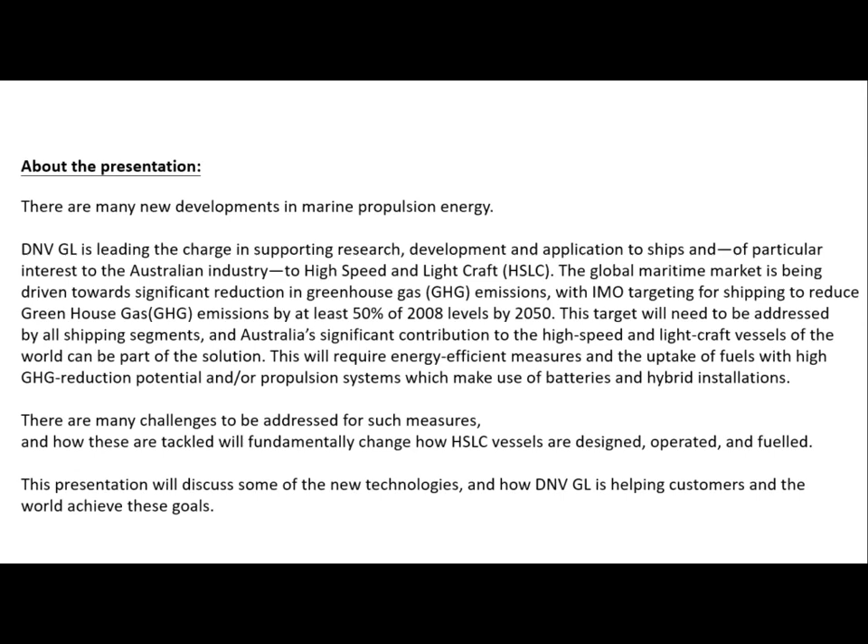Phil, I'm Jonathan Abrams, not Adam Williams. You probably can tell, and you can probably tell because I'm wearing a suit. I don't get on the tools very much.

I'm here to set the scene for one of the main parts of tonight, which is to talk about alternative fuels and where we're heading in that direction. It will cover some of what we're doing today, the most recent IMO meetings and some things that have come out of that. We'll talk a little about the practical application of alternative fuels and what we're seeing not only in Australia, but regionally and globally. This is to set the scene so that when Adam comes up and talks more about the engineering and structural side of alternative propulsion systems and fuels, it gives a backdrop on why this is happening a little faster now than in recent times.

There's no doubt about that. Let me just... Yeah, okay. Okay. No. All right, technical glitch.

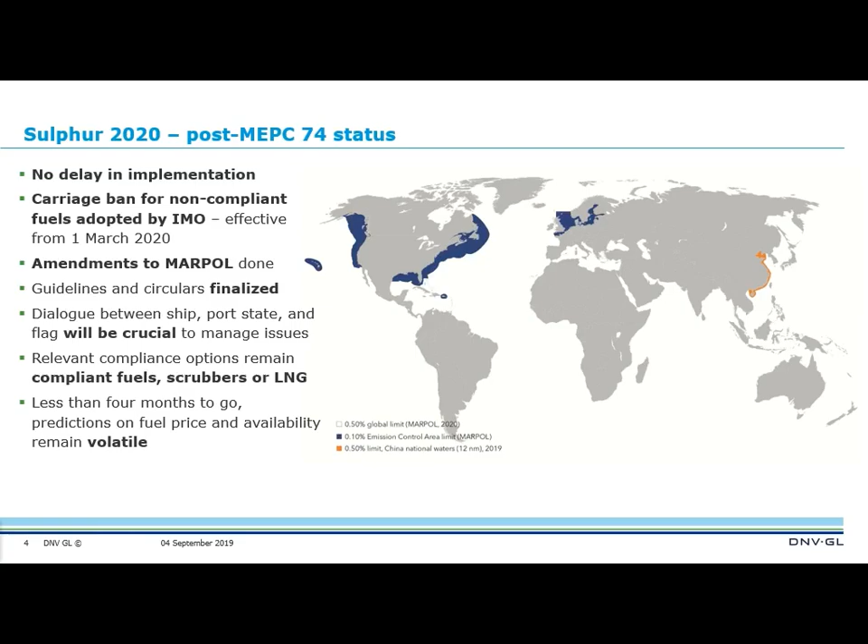The other thing is that apart from compliant fuels or scrubbers, alternative fuels come into play there. So LNG is a viable option, and those sorts of things, amongst others, which we'll talk about in a moment. So some of the outcomes, have the regulations been fast-tracked? I guess the answer is yes to some and no to others. As I say, it has been a long time coming.

Anything that goes through IMO needs a lot of lead time to get accepted, and then to be passed into law. One of the other things they're looking at is, at MEPC, with a view to reducing global emissions, what are some of the things that can be done by ships, by flag states, by the industry in general.

They're looking at setting in place short, medium and long-term measures. There were a lot of submissions from a lot of countries about what could be done. These were all open for discussion, and over the time of the meeting these things were tabled by member states, and some were discussed. Some of the simple low-hanging fruit were things like reducing speed limits to reduce fuel consumption, therefore reducing greenhouse gas emissions. Others were related to the Energy Efficiency Design Index, the Ship Energy Efficiency Management Plan, and so on. There was no single consensus on the best ones, but there were a lot tabled.

These things will be discussed, debated, and a final list of measures, cut down and divided into short, medium and long term, will be in force by the end of 2022. So change is coming. It's been a long time in starting, but it will actually ramp up quite quickly, and it will catch some people unawares. There's no doubt about it.

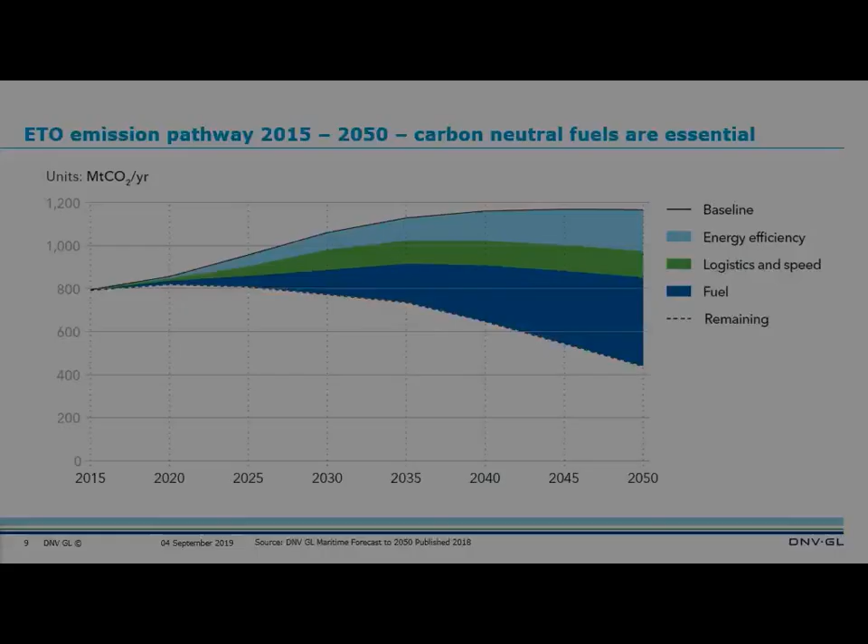So the future looks at - this is based a little bit on DNV GL research, but it's not unique to us - these are generally accepted figures on where you can find the savings to reach that target. As I said, logistics and digitalisation - digitalisation in many cases looks at optimising data about your operation so you can identify wastage and cut it. Greater than 20% can actually be reduced or found from that sort of activity.

If you look at hydrodynamics, that's the ship design - it covers not only the hull lines but also the propeller, the fins, and whatever else you might have, including coatings and the like. Another further 10 to 15%. Machinery - again optimising systems - 5 to 20%. And then the fuels and energy source could be up to 100%, and that's when you go down to zero emission fuels, which by 2050 will be commercially available and viable to some extent. But again, a lot of measures were discussed by the member states at the IMO.

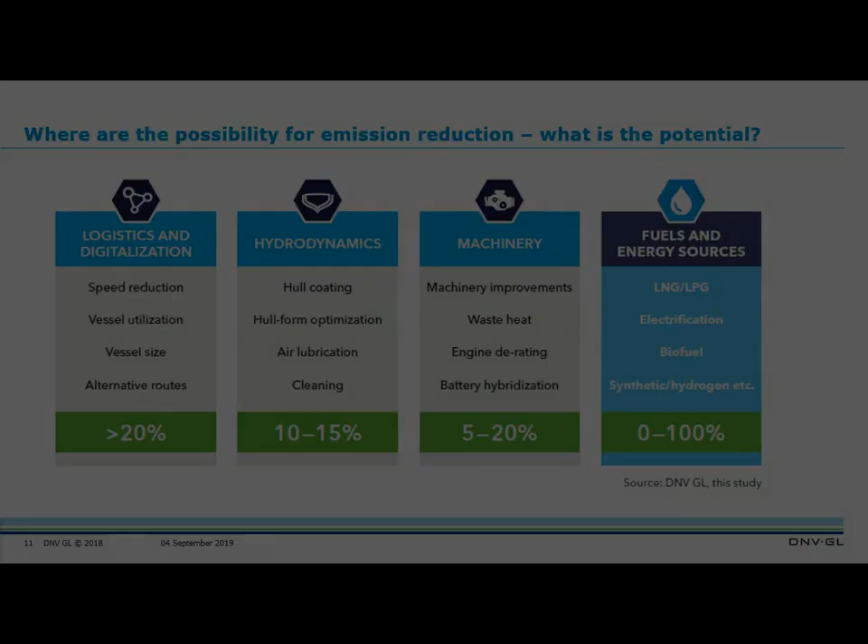Not all of these relate to ship design, but I'll highlight a couple that came out of those areas. They talk about the EEDI, the Energy Efficiency Design Index. They're looking at further developing that, taking it up to Tier 4 for new ships, with a lot of speed reduction and speed optimisation.

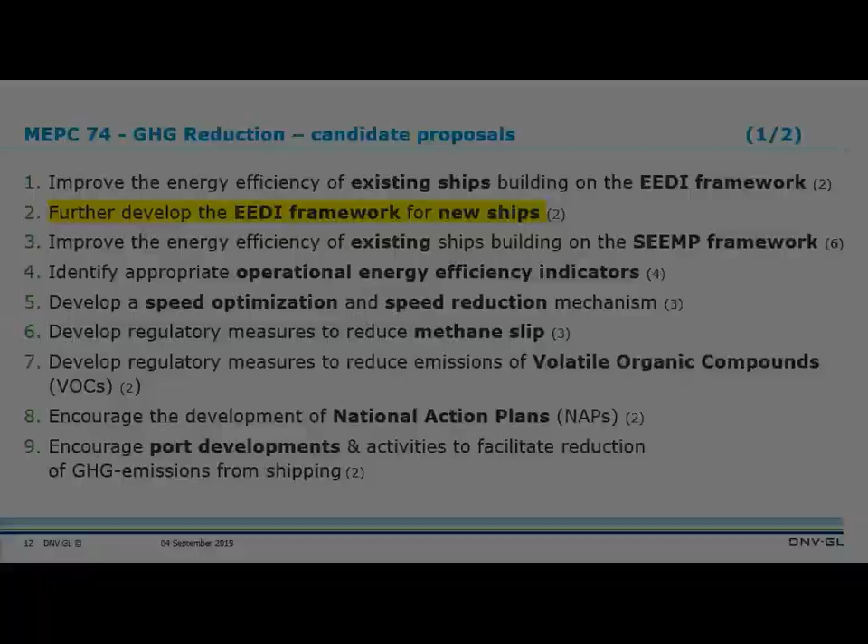Some others were research and development into new activities related to the ship as an ecosystem, not just the structure, looking at implementing the uptake of low carbon or zero emission fuels. That implementation program involves incentivising through port fee reductions, subsidised fuel, and encouraging the use of LNG systems, for example subsidies on some of the systems that go into ships.

So a range of things which were given some airtime at MEPC.

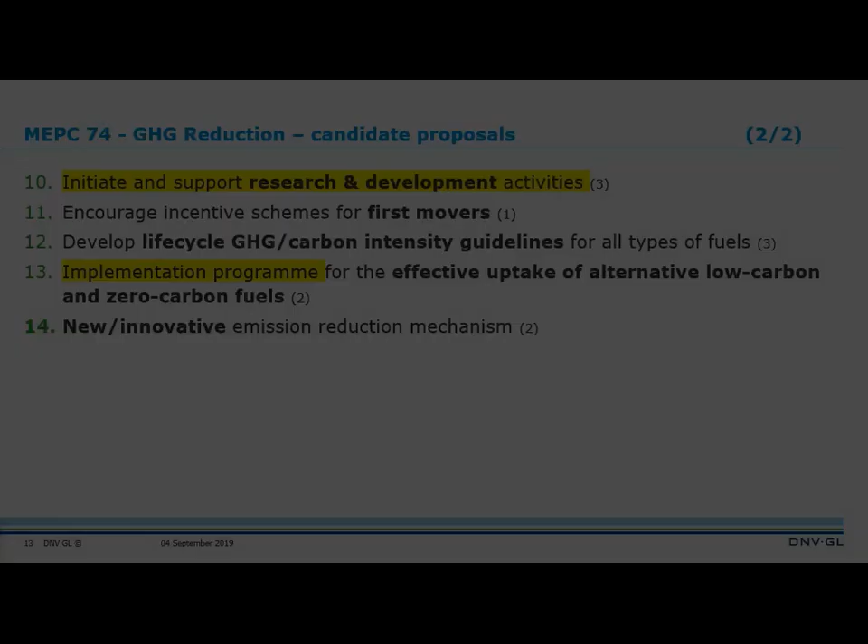The Japanese took a slightly different, more formalised approach, making mandatory design efficiency improvements—not just suggesting these, but actually making them mandatory. That's one way of forcing the issue, and within reason it was reasonably well received, but it's hard to be too dictatorial across all segments and all types.

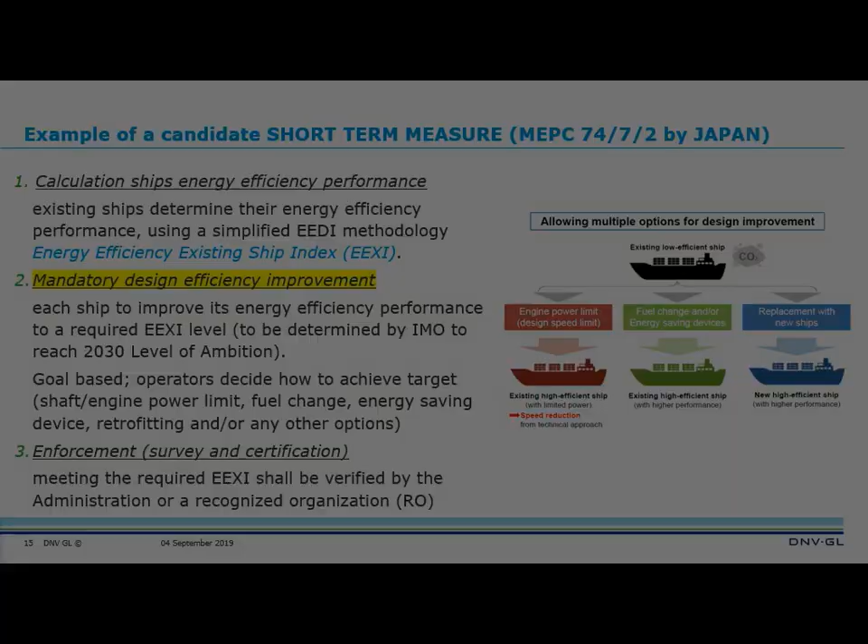The Danish talked about meeting a certain carbon intensity target which would be set by the IMO. That's one issue raised amongst a number of flag states—that a higher body like the IMO will adopt an accounting method for carbon intensity and say, Australia, this is your share of the carbon footprint, this is what you need to reduce, and you go about it any way you want.

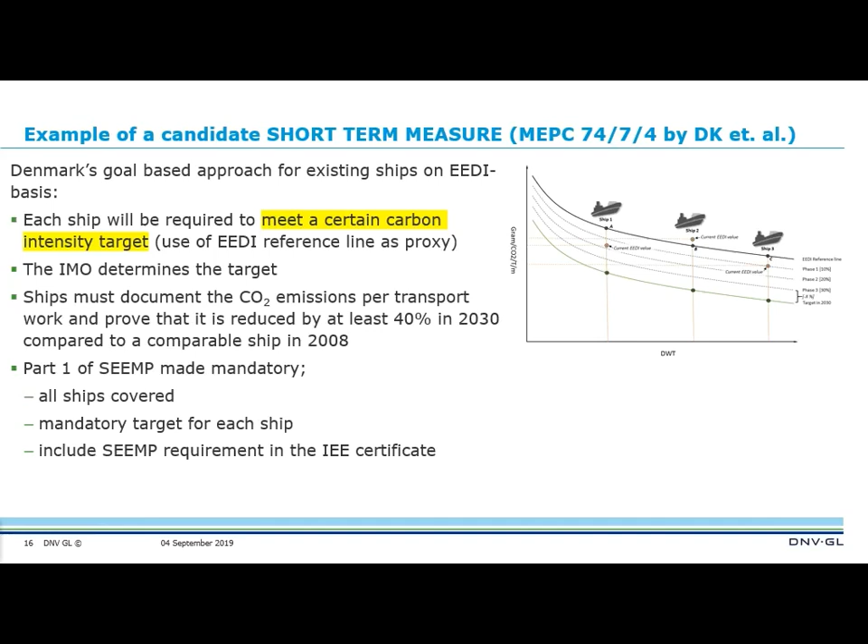Not every country was in favour of that, because those with particularly large flagged fleets, like Marshall Islands, may not actually have very much influence over what they can achieve. But again, these are things for debate.

So what is the pathway? I think everyone is hoping for a silver bullet, and everyone in this room would know that doesn't exist. We need to take a measured approach, and we also need to be practical about the implementation and the uptake.

When we look at now, next, and the future—now is today, next would be the next 10 years, the future would be heading out towards 2050—these are some of the paths or options that could be used today and in the future, which we anticipate to start heading in that direction to get down to that emission reduction target.

So the obvious ones are LNG and LPG—we'll talk a bit more about that in a moment. Over the next 10 years, we're going to see greater uptake in ammonia, biogas, hybrid technologies, hydrogen drop-in fuel cells, and the like.

When we go out to the future and talk synthetic fuels, we really mean zero emission fuels, but also ammonia, where the only byproducts are water and nitrogen. But underlying all of that, you can't just build it and hope that the effect is there.

This is where the attention to the management of the ship as an asset and in operation, as well as in design, will come into play. Going back to what the Japanese delegation proposed, some mandatory design guidance may also come into play with these things.

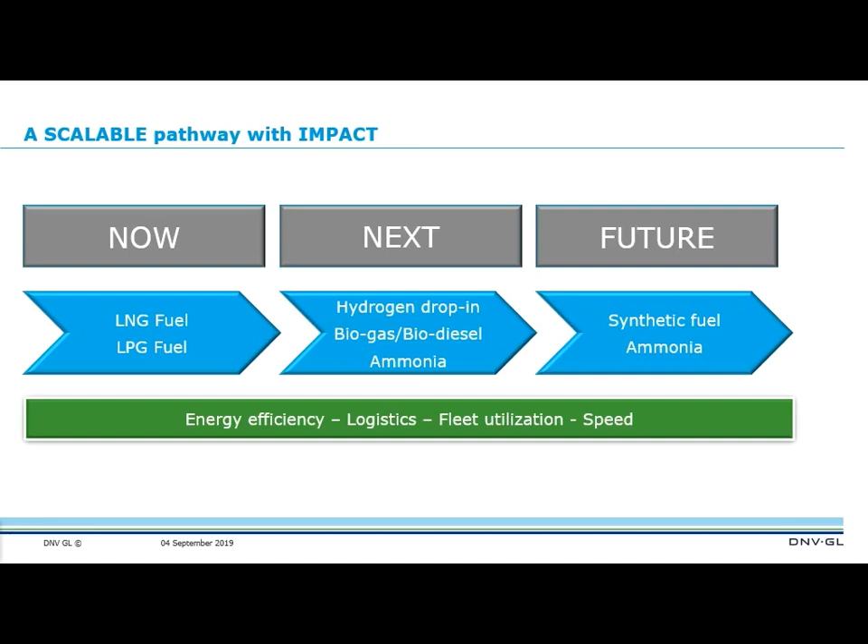Focusing a little more on the now—and I think that's what we're talking about with what Adam will cover as well—what are some of the things we're seeing today in this alternative fuels sector? LNG is one of those areas.

LNG has been big, viable, and growing in Northern Europe for some time. It's getting more attention in Australia than ever before, simply because we make and export more of it than any other nation on earth. So what is the uptake of LNG as a marine fuel looking like at the moment? Short answer: it's going pretty slow, but it's getting more and more momentum as we go along.

Key to this, which is always surprising, is how little there is in Southeast Asia and Asia in general. It's turning into, in many ways, the hub of global maritime business, certainly shipbuilding. But there's very little uptake as yet in LNG, despite the fact that a hell of a lot of LNG from Australian gas fields goes to China, Japan, Korea, Taiwan.

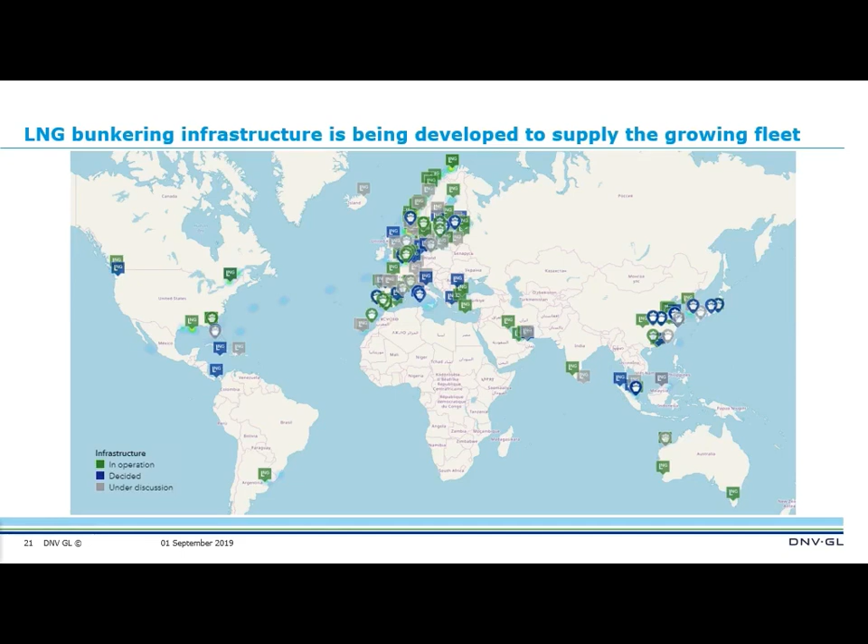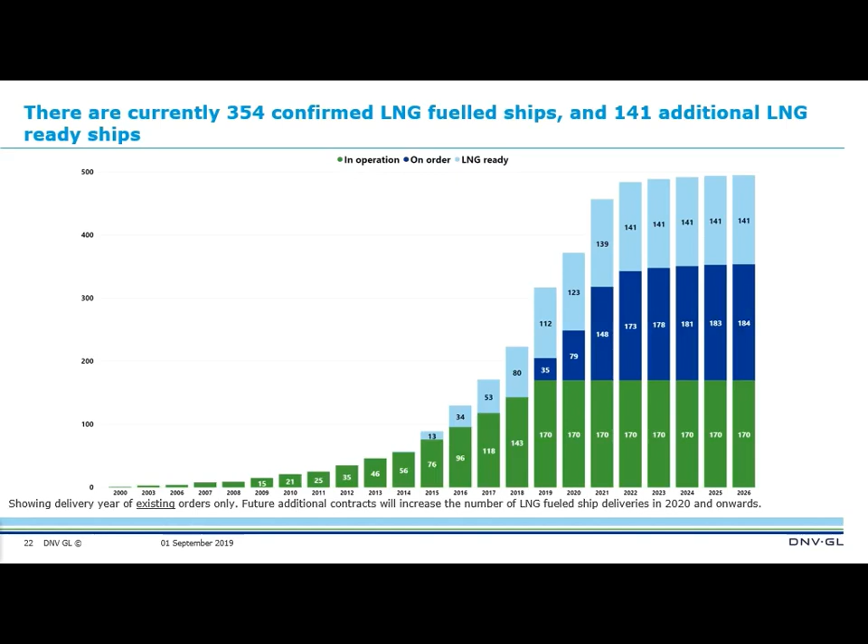Put it into context, at the moment there are 354 confirmed LNG fueled ships globally sailing, and 141 which are LNG ready, deliberately built to retrofit up to that. It's not a lot when you think of how many ships there are sailing globally, but it is increasing. This last month there was another 17 or 20 new LNG fueled ships on the order book, and that's significantly more than in July. So it is ramping up.

By segment, we're looking at car and passenger ferries as the tallest one. This is largely driven by the likes of Carnival and Royal Caribbean, who tend to, because there is an emission control area in Europe and in North America, use this as one alternative they can take as well. The other big ones were container ships and cruise ships as well.

So it's in that sort of space, but there's not a lot in bulk shipping for sure, despite efforts by BHP to lift that number. Those orders haven't been placed, so this is only ordered or known orders, but it is moving in that right direction.

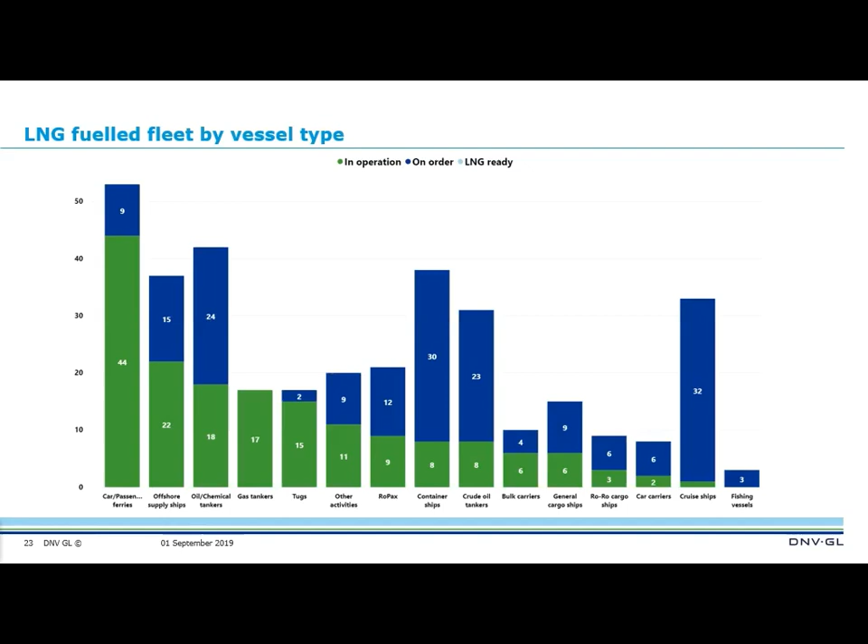Scrubbers I'll touch on very briefly, only to give it in contrast, because going forward for compliance after 2020, you have to have used low sulfur fuel or gas oil, LNG or something similar, or have a scrubber fitted so you can use HFO. There has been an explosion in the fitting of scrubbers to ships globally. They're everywhere. There will be more of them, but there is a constraint on the number of ships that can be fitted in time, particularly over the next couple of years, to expand this number exponentially.

In terms of the payback on scrubbers, when the difference between low sulfur fuel, the new compliant fuel, and HFO is very wide, payback is obviously very short. But what we're seeing at the moment is, even in the last 3 months, the delta between low sulfur fuel or gas oil and heavy fuel oil is actually getting narrower and narrower, which means the business case to install a scrubber is getting weaker and weaker over time.

Most vessels which you see here have been installed as retrofits. New builds are now getting built with scrubbers on board, but again, that position is starting to weaken because there is another problem with actually getting supplies of HFO after 2020, when very few ships will actually be able to use it.

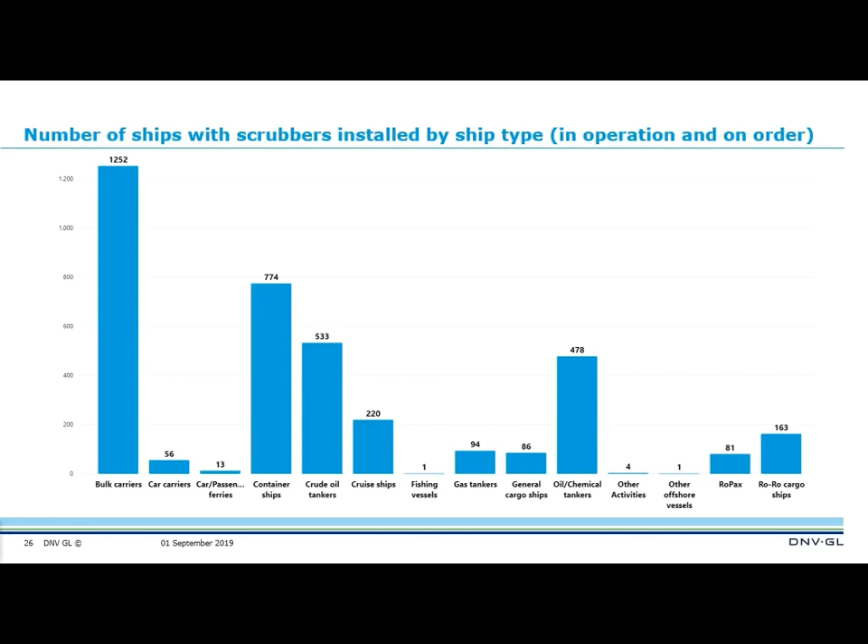Open loop, closed loop, hybrid scrubbers - it's an environmental issue or an environmental furphy, depending on who you talk to. But there are various regulations around discharge of sulphur from an open loop scrubber directly into seawater, particularly around sensitive areas like the Great Barrier Reef or in certain ports.

Getting close to the end here. Batteries is something which Adam will go particularly into, but it's again something you can see in Norway. These are ships which have diesel electric systems, generally speaking. There'd be some pure electric systems in there, but a lot of them are diesel electric. Again, you look at where they're most clustered, and that's Norway.

That's directly a result of the incentive program the Norwegian government have initiated more recently. But there are a few in Australia as well - several tugs which Svitzer own and operate around Gorgon and some of the other facilities. So there's a bit of an uptake, but they're limited by their range. Batteries don't yet have a viable solution to be scaled up to deep sea and international shipping.

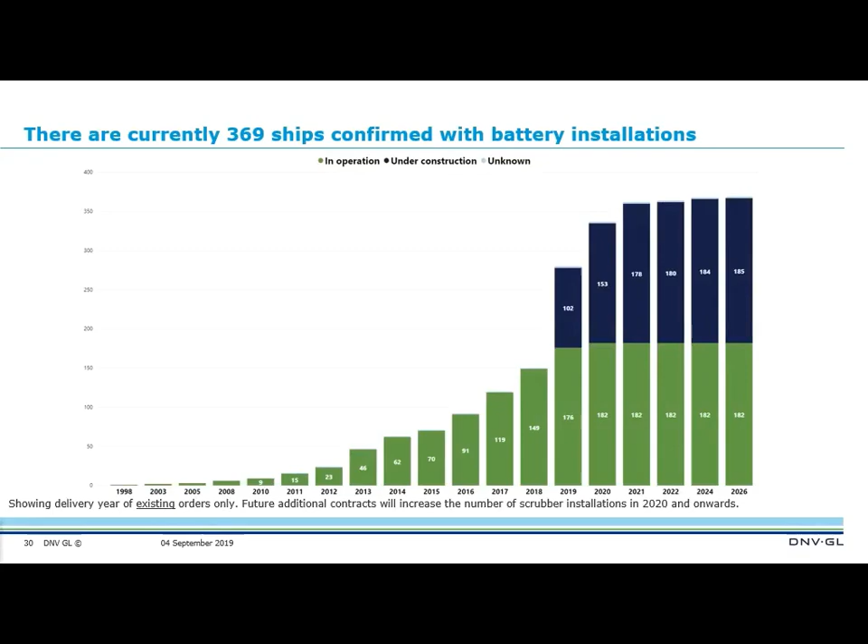Interestingly, there are 369 ships confirmed with battery today, which is very similar to the number of LNG confirmed ships. So they're tracking similarly, but they have a vastly different way to go in terms of their application.

Again, without wanting to ring alarm bells, but rather setting the scene - things have been moving very quickly over the last 18 months as IMO 2020 comes on. People are looking for solutions to avoid the price hit that will come from having to go to marine gas oil or low sulphur fuel.

But these are not the only things the shipping industry needs to be worried about, because when you sort out sulphur, you then have NOx, and then you may have noise and vibration, and particulate matter. There's a whole range of things on the community's agenda to try and fix. We talk about biofouling as well, and invasive species - that's something getting increasingly focused on in this day and age. Underwater noise is a very key one, and there's also ship airborne noise as well.

One of the biggest problems that Gore Bay has here - the Shell or Viva refinery facility - is not so much with emissions, because they're running on gas oil when in harbour, but it's the airborne noise, not only at the high frequency but the very low frequencies as well, which can propagate right across to Balmain. I don't know the full effect, but apparently it makes you feel very sick.

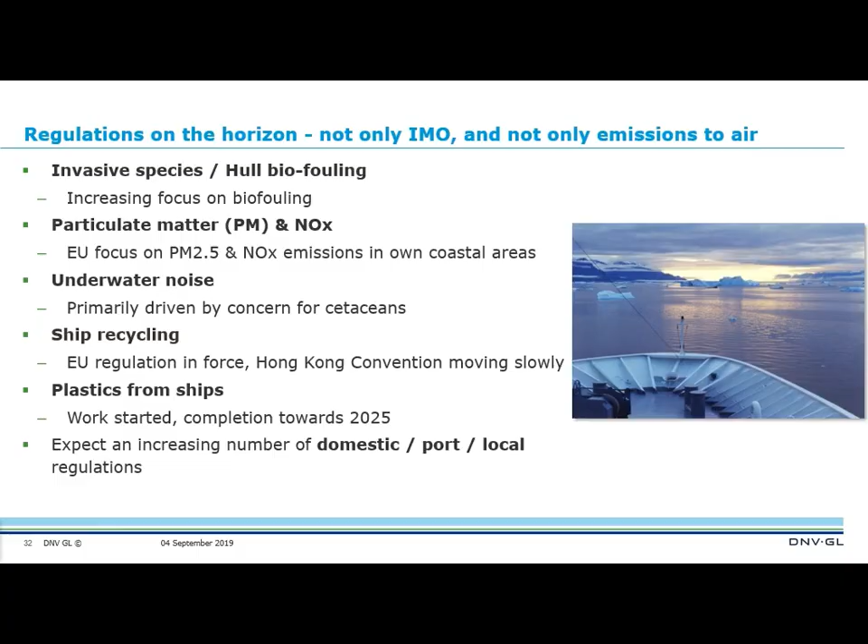So there will be, on the back of all these issues, or not new issues, but things coming into the spotlight, increasing attention to regulations. And it's not just one size fits all, even in a country like Australia. There's the national regulations, the state regulations, the port regulations, and that includes the EPA, which don't traditionally work on water, but because the port facilities are subject to EPA regulations, there's a lot of attention in this area as well. So it's not to prepare for the storm, but it is a little bit about being ready for change.

I think as we go, just about to finish here, and I'm sorry for dragging it on too long, but the changes being talked about here will start to impact vessel design and operation very soon.

We, as a company, and certainly from the advisory side, do a lot of work in new vessel design, assessing them relative to regulations, doing model testing around emissions and around efficiencies as well.

There is this push from the supply chain, from the charterers, to make sure that shipping is using as low carbon fuels as possible. They're looking at carbon neutral fuels as well, something which needs to grow in recognition and in application. These things aren't going to be announced tomorrow, but there's a lot of talk about it, and it's an ongoing process.

Believe me, I'm sure we'll all experience it - by the time a new regulation about carbon emissions or zero emission fuels comes in, there'll be a lot of people who say they'd never heard about this before. But we've been talking about this for 20 years, and it will go on as we get closer to 2050.

So I'll take a breath now and get out of your face. It was to try and set the scene, not to ring alarm bells, but to set the scene that what Adam, the design team, and DNVGL do is try to service the industry in any way, shape or form that suits the purpose.

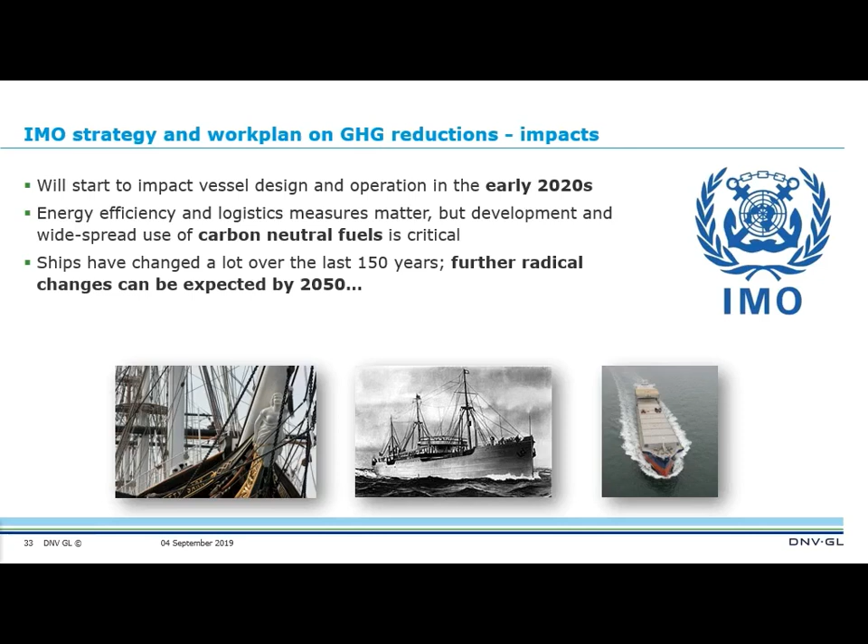Great, thanks Jonathan. I think he's pretty much set the scene of what's coming. Jonathan's more focused on what he's seeing at the IMO, and what I'm doing is more with ship structures and what we're actually seeing through DNV. By no means am I an expert in some of the technologies I'm talking about, but I'm trying to say what we're trying to provide, what we're trying to do, and what we're going to go through.

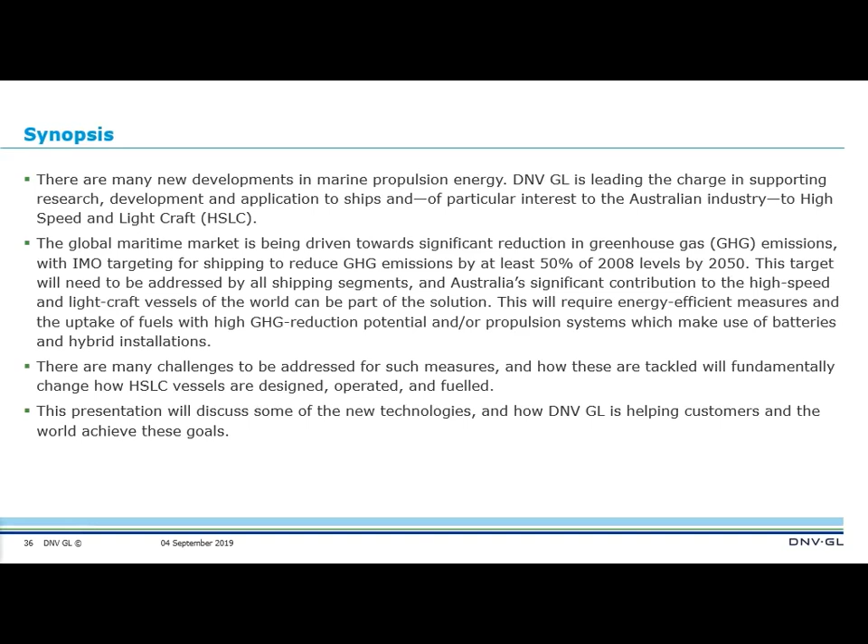A number of the technologies that are coming, as Jonathan said, we're going to be seeing in the next few years, whether we like them or not. That's just a synopsis.

I'll actually just go through that. Tonight I'm going to talk primarily about three main technologies being used in ships: batteries, fuel cells, and gas fuel. Those can all be used together or independently, so it's a little bit confusing, and if items are being repeated, I apologize. As I say, you can quite often have a gas fuel installation with batteries - a hybrid - or fuel cells and batteries to store power.

So I'm going to start with batteries. Just briefly, I'll use this with a couple of different slides, looking at the energy densities. Tonight's talk in particular is about high-speed light craft, and the reason I chose that is because Australia is a very large producer of high-speed light craft ferries. We've got a number of builders in Australia, a number of successful designers, and I think we're servicing the world to a very good rate.

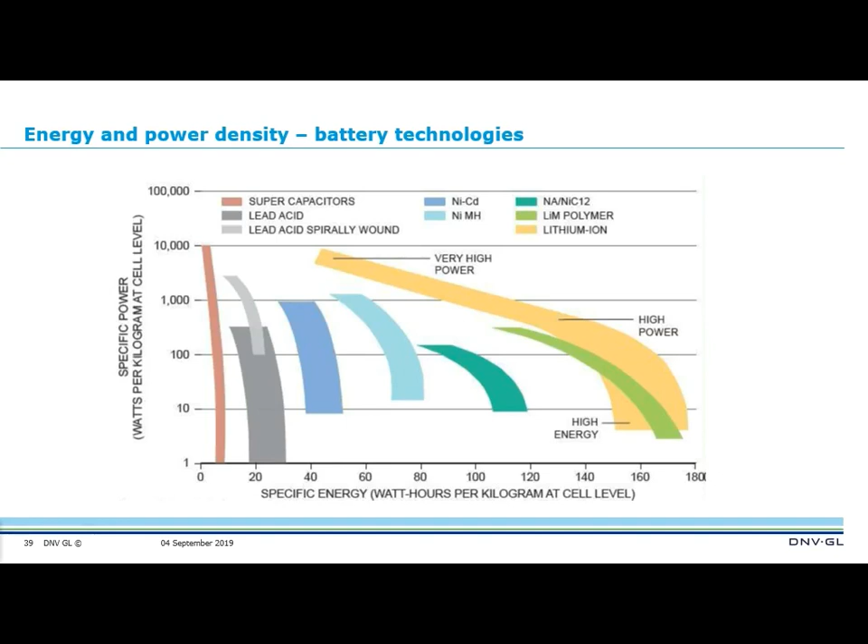I must admit, when I started looking, I wasn't sure of, when somebody said a battery, are we talking a tank with some acids in it? What are we talking about?

So there are actually different formats. You've got obviously the different chemistries, and then you've got the different ways that those are presented, which presents many challenges when it comes to actually installing in a ship. What we're seeing is it's not one size fits all. There's different ways to handle that.

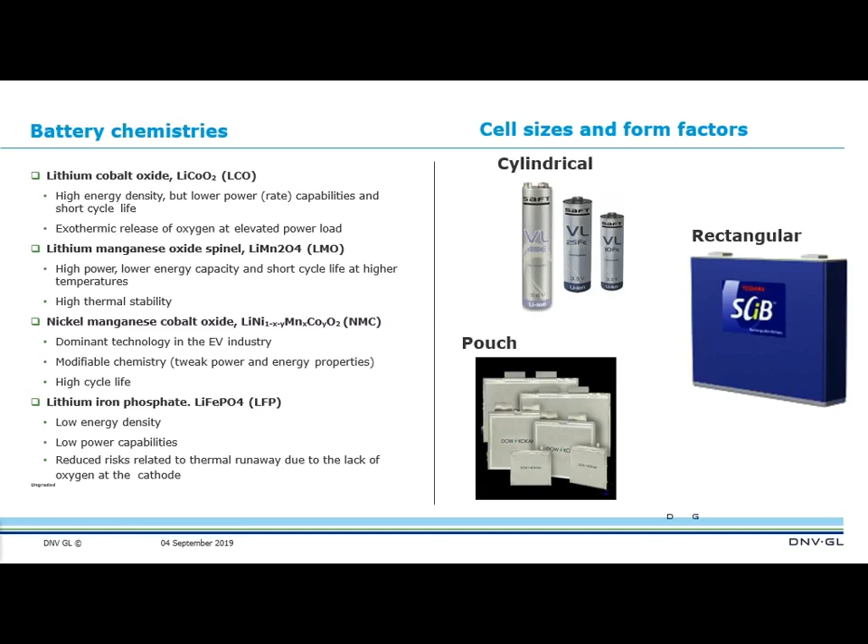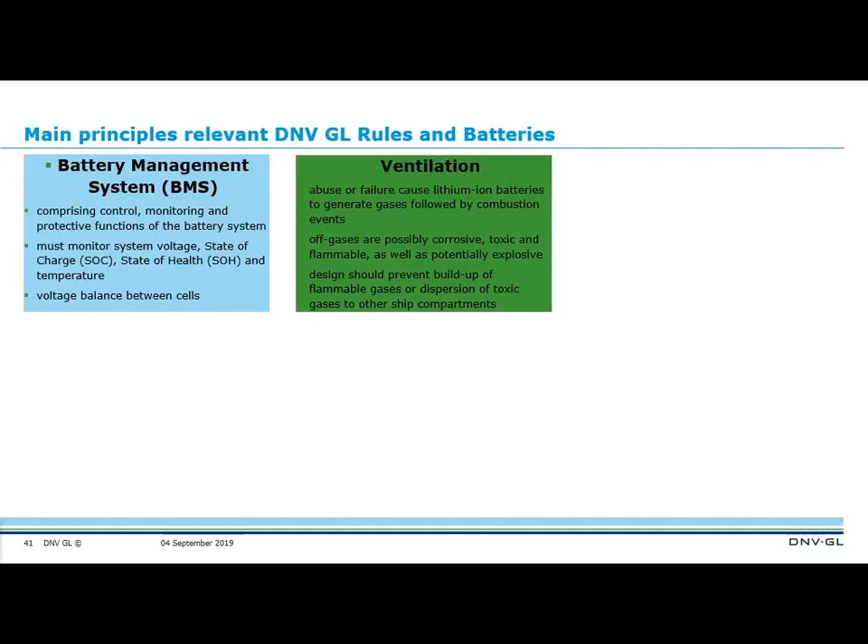One thing we need to consider is how DNV is approaching how to install those. I'll quickly run through the items that are considered, and basically you need to look at how your batteries are being managed. It's not just as simple as connecting your batteries up all in series or in parallel and then just running with the power. You actually have to monitor every cell.

You have to make sure that each cell's state of charge and state of health is being regulated. When you charge it, you have to actually look after each cell. If you don't do that, you'll find that you've got one dead cell and you're actually creating problems.

Ventilation - when things go wrong, you need to be able to get rid of gases. When they fail, they typically what they call gas off, and that gas off can lead to quite corrosive, quite dangerous, quite toxic chemicals. So these are the sorts of things you need to do.

Power system integration - you can't just have the batteries and hope everything works. You need to actually see how that's working with hotel load, with your engine requirements, with various different systems that are on the ship.

Fire protection. We've all heard about people not being able to carry their laptops or phones in certain places. Well, it's very similar on ships. You need to basically be able to manage that, and if things do go wrong, what do you do about it?

Thermal management. When you've charged your battery on your phone, you've probably felt that it gets quite hot. Again, there is a lot of heat in its use. If you're demanding a large amount of power from a battery, that can create a substantial amount of heat, so you have to cool them. And if you don't cool them efficiently and effectively, they can break down and you have a failure.

And then the last one, inversion technology. Now, one thing I'll note is that with electrics and batteries, one advantage is you can actually have your power source, your batteries, almost anywhere on the ship because you can connect it via cables. You're in a situation where you can optimise the location throughout the vessel, which I think will be beneficial for high-speed light craft.

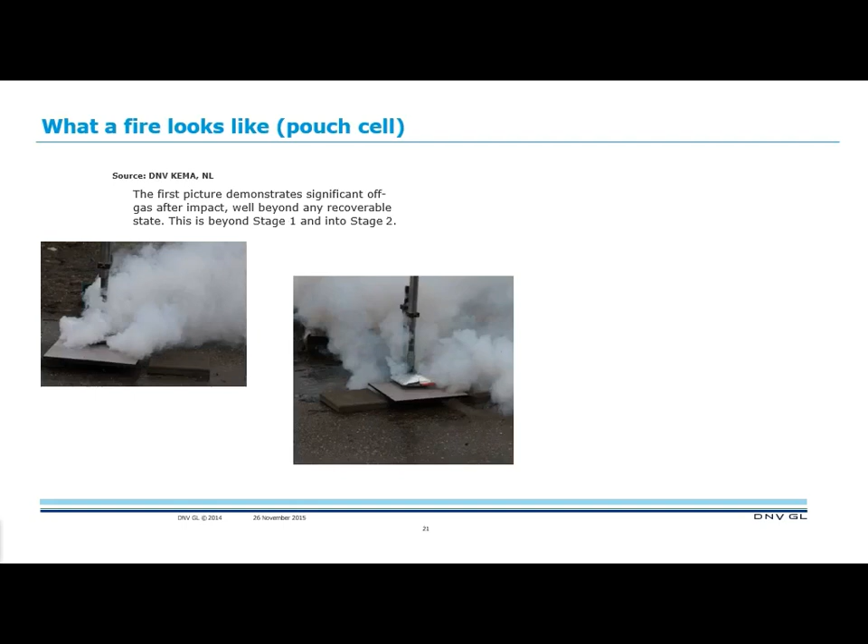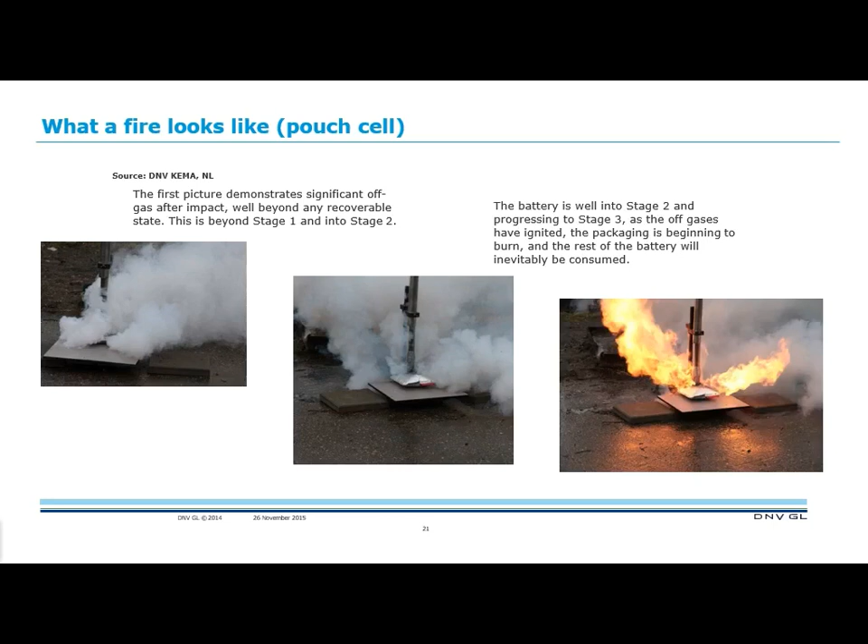Now, I mentioned the fires. This was a demonstration done by DNV KEMA, and they wanted to look at what happens to a battery. I believe it actually pierces the side of the cell. You can see that it's gassing off, and then it obviously catches fire. Think about the amount of power that's stored within a battery. This is a pouch cell, and once it shorts, there's no controlling it. Very difficult to manage.

I mentioned that for vessels there's no one single source, and the next two vessels I'm about to show you are a good example of that. The first one's the Vision of the Fjords. As Jonathan mentioned, the Norwegians are really pushing ahead. One of the companies works near Flåm, and it's a carbon fibre vessel, 42 metres long. This one's a hybrid with batteries and also diesel. Quite an interesting design, quite unique.

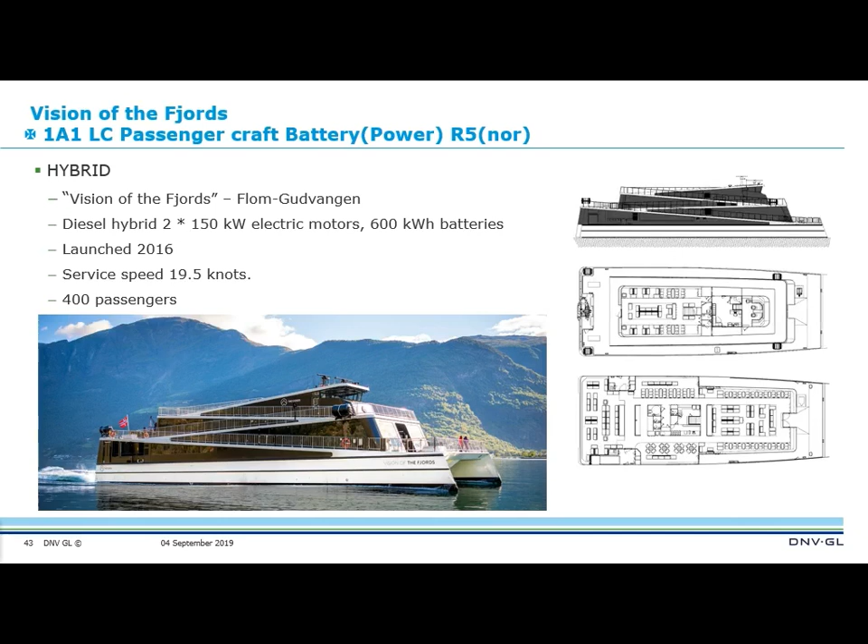The thing is, its sister ship looks very much the same, but in this case it's full batteries. So they've learned from the technology of the hybrid, and they've gone to the batteries. Now, one challenge that was put forward with having a vessel that requires that much power is how do you charge it? You plug it in overnight?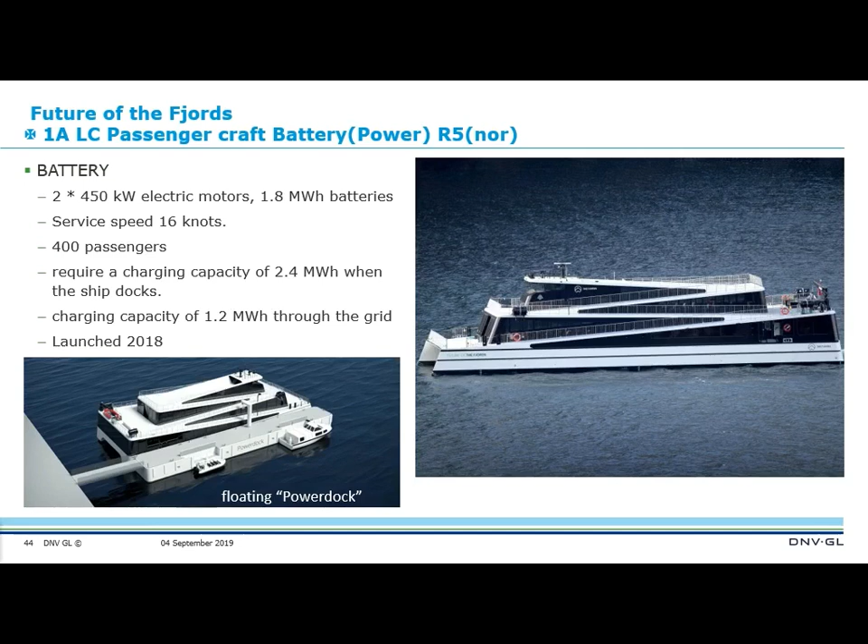Well, because of the requirements, they worked out they could do this. This item here - they've called that the power dock. It's got 5.5 tonnes of batteries in it, and it sits there trickle charging from the local grid during the day. As the vessel, the Future of the Fjords, pulls up, it's able to be charged within 20 minutes and keep going on its run. So yeah, pretty amazing thing.

So this is when looking at the installation and the way forward, and DNV is what we're working with, and DNVGL is actually originally Norwegian, so it's quite obvious that we'd be working with it. So we've got notations within our rules, in particular, they are actually in the rules for ships. However, if you're doing high-speed light craft, you start with the rules for ships, you talk to us, and we make them fit. So that's not too much of an issue. There's not much point actually writing two separate sets of rules because the basics of safety, etc., are pretty much the same.

The notations we've got is battery, battery with a notation of power or safety. The power one is when the vessel is basically using battery 100%, there's no second source of power, whereas safety is where you've got a hybrid.

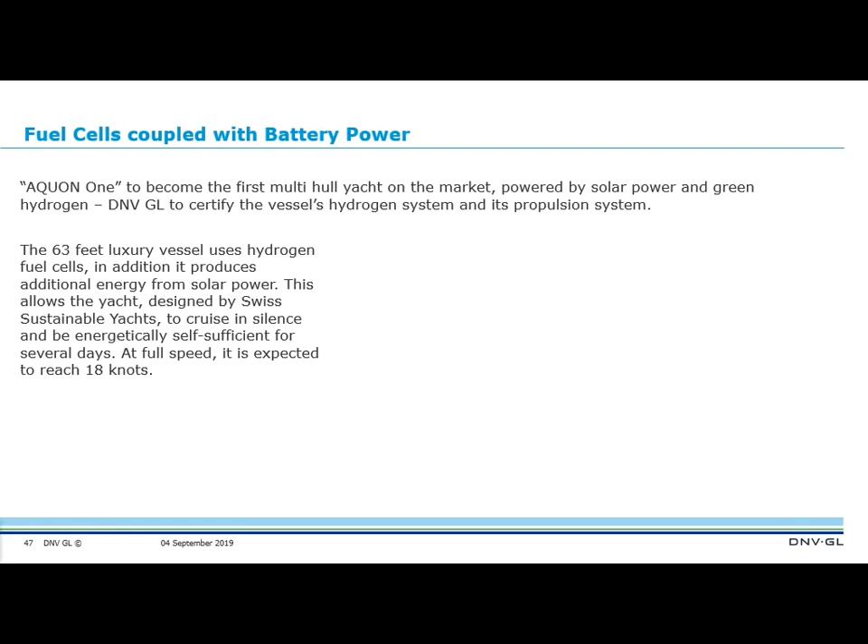Second one that I hope to talk about is fuel cells. This is a vessel that DNVGL is working, we're working to certify the hydrogen system and the propulsion system. It's an interesting design, this one's actually not commercial as such, it's a yacht. The idea will be that the designer, Swiss Sustainable Yachts, are putting forward a design to pretty much take advantage of lots of wealthy people who would like to have something that's green.

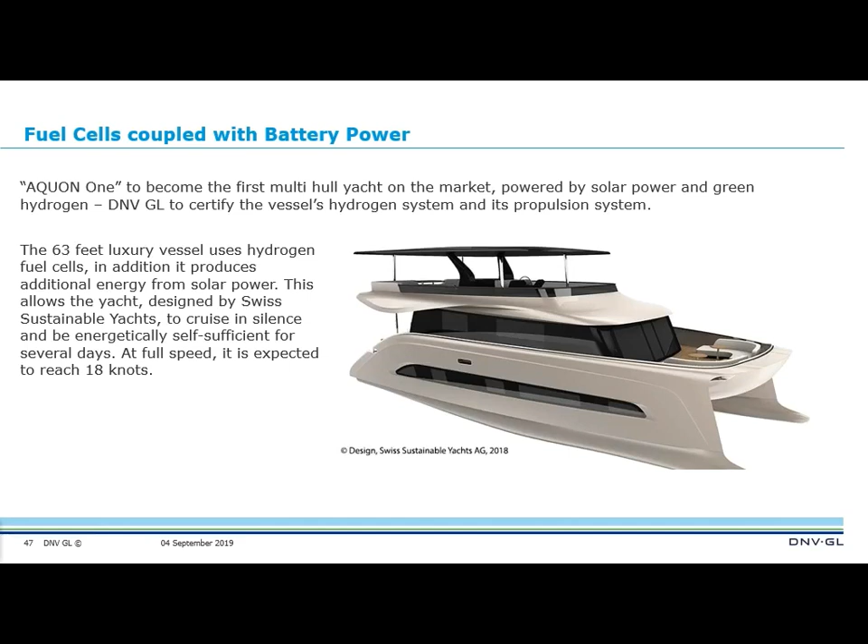What's not obvious in that picture is the top of the sun deck is actually a solar panel, so it's actually able to charge some of its own. The solar panel on top will help recharge the batteries, and therefore will extend its operational capabilities. And DNVGL's working with the certification of the hydrogen systems.

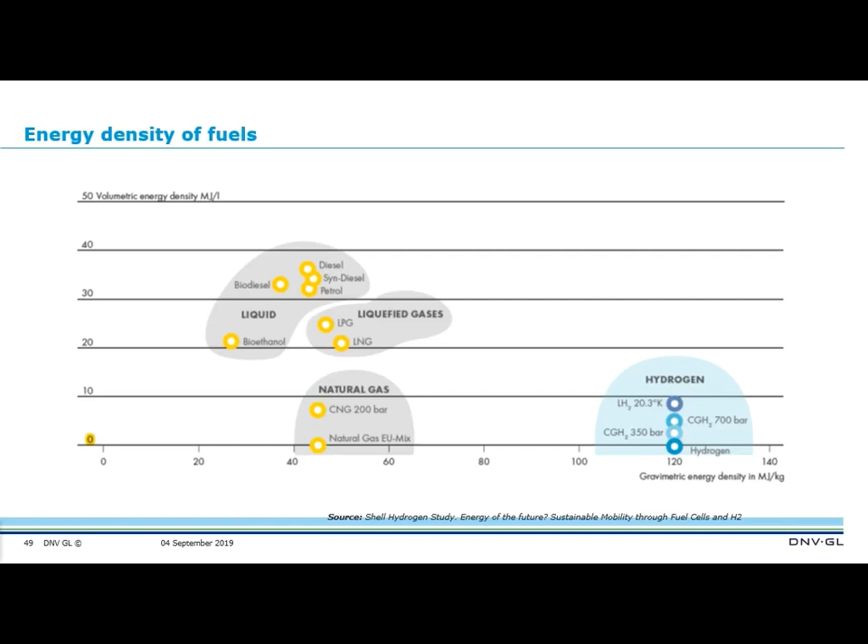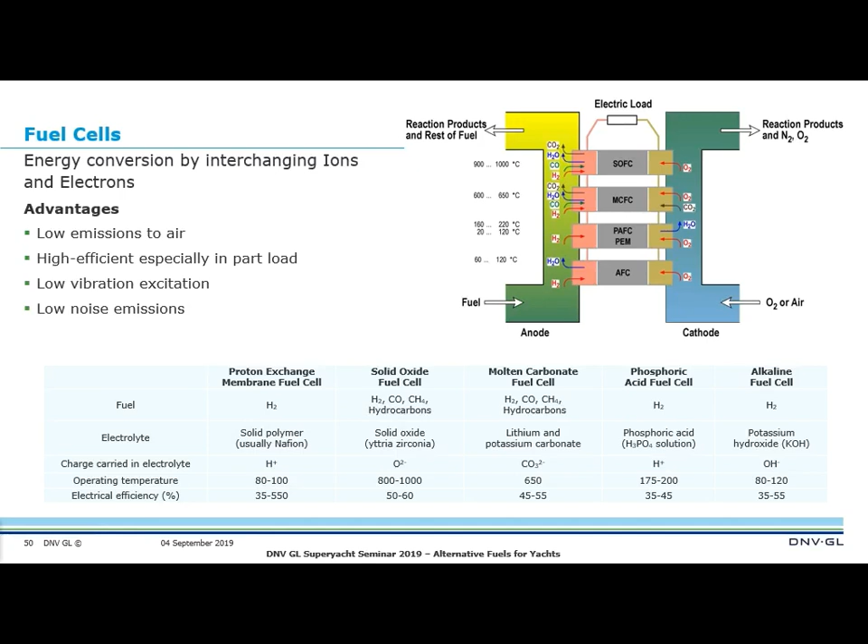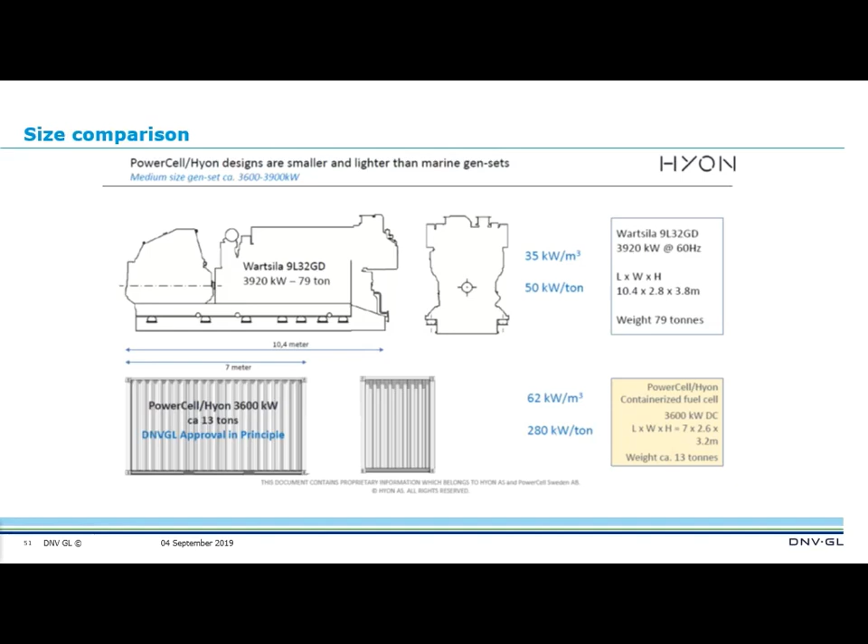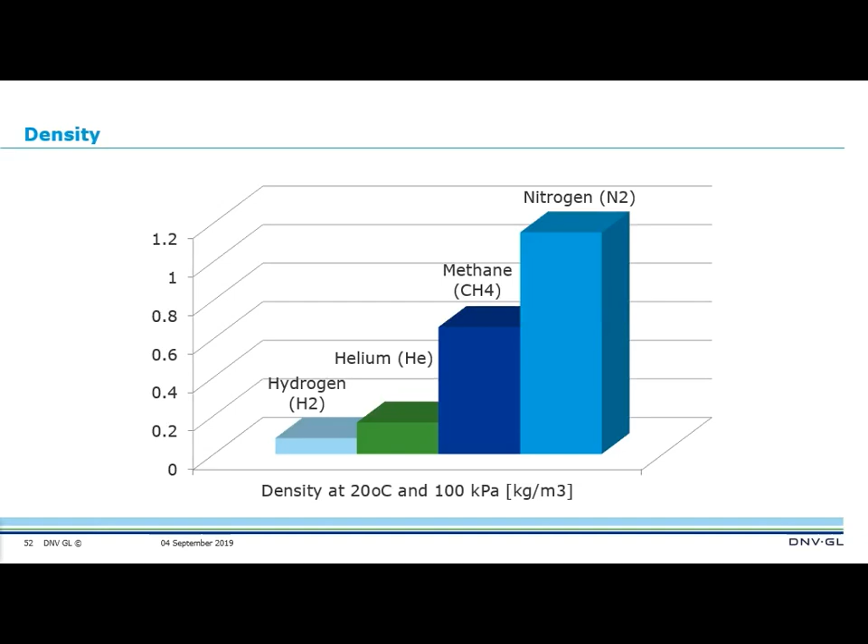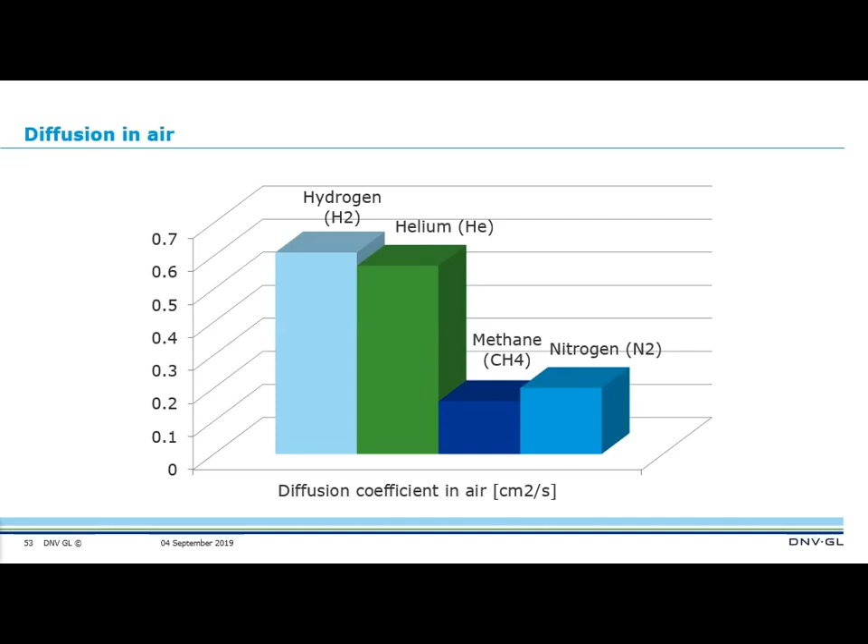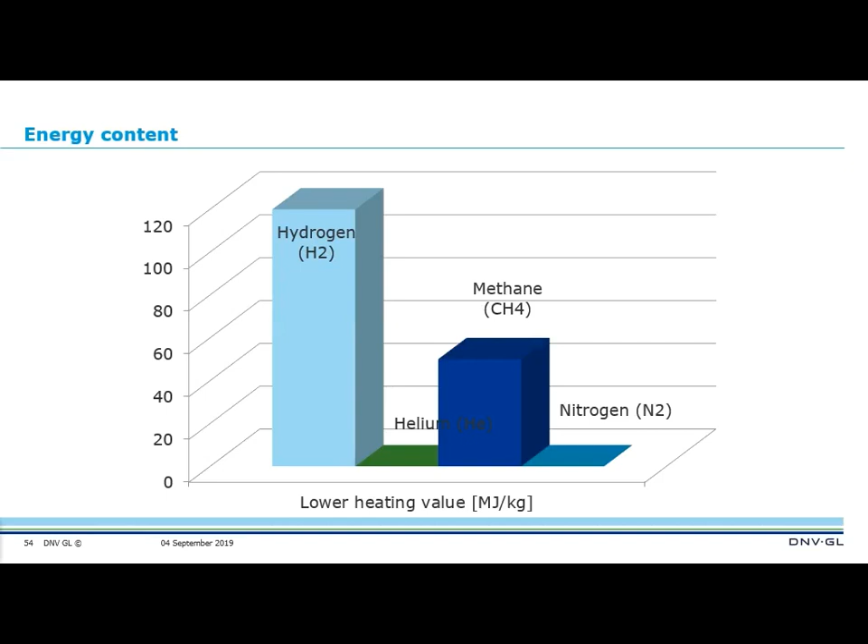Energy content - as I mentioned before, hydrogen has the highest energy content per kilogram, but you've got to get it into kilograms that are manageable and usable so you can take advantage of that.

Flammability - this one's about safety. Hydrogen's flammable range is from 4% to 75%, which means it doesn't matter how much is released, or whether it's a small space or a large space, it's something that needs to be managed. It can become very dangerous very quickly. Compare that to methane, propane, and traditional petrol, and you can see that presents a challenge.

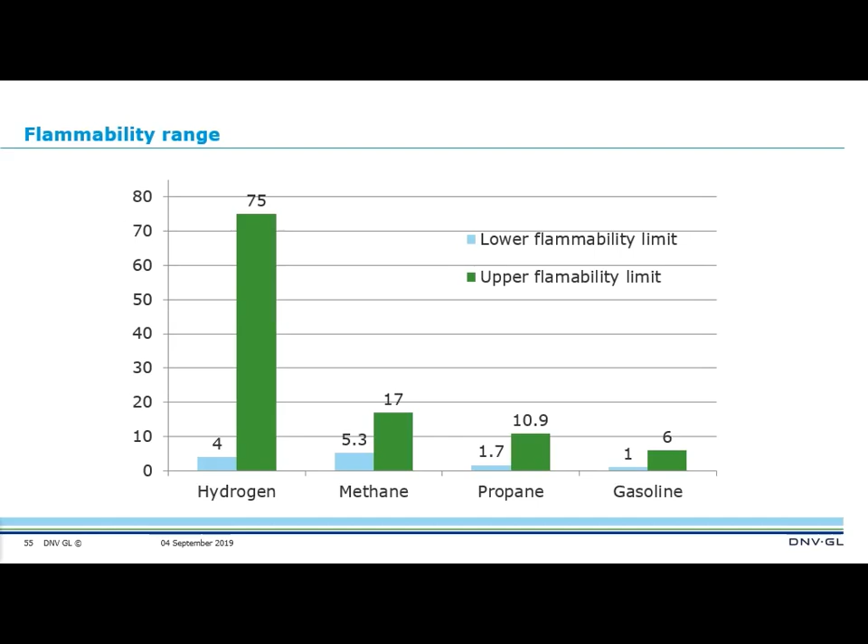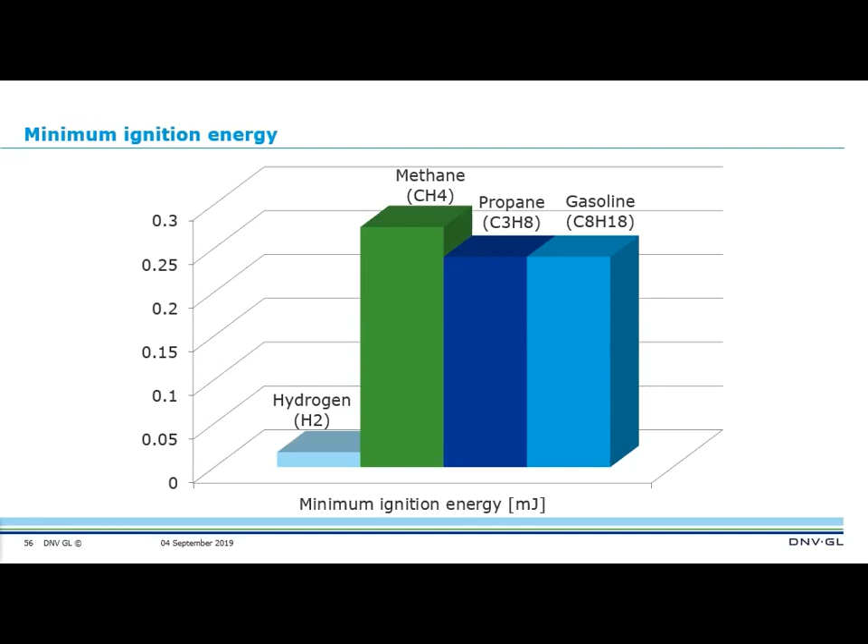Ignition energy - again, it doesn't take much to set fire. The other interesting thing is that a hydrogen flame is invisible, so it's not immediately apparent when you enter a space that's got a fire, assuming you haven't had an explosion. If you've got a problem, it's not immediately apparent - you can't see it.

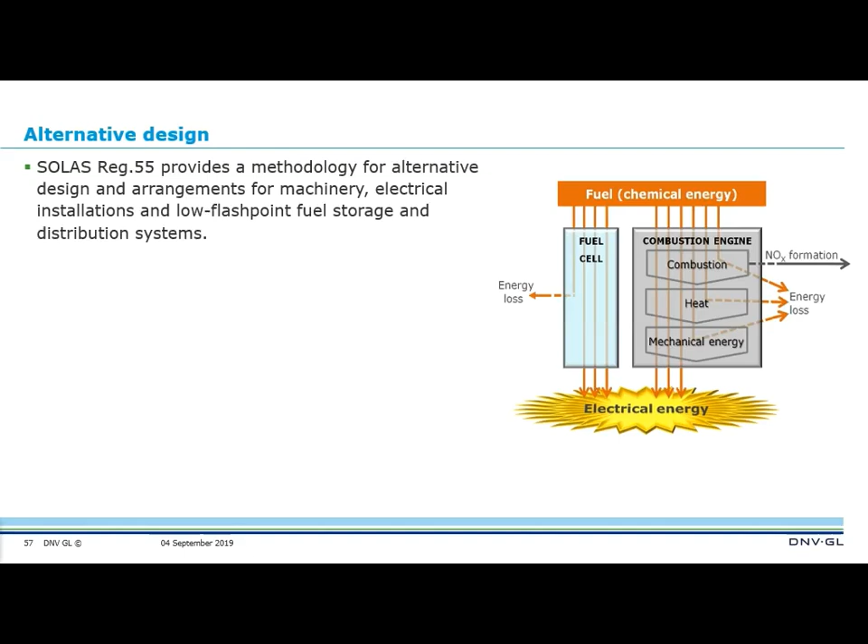So looking at regulation and how hydrogen is managed, you might be familiar with, and I think one of the next slides talks about, the IGF code. We need to look at how hydrogen is considered and installed on a ship, which needs to be done through an alternative design approach. There are guidelines for that alternative approach, and I'm giving a reference to the IMO document.

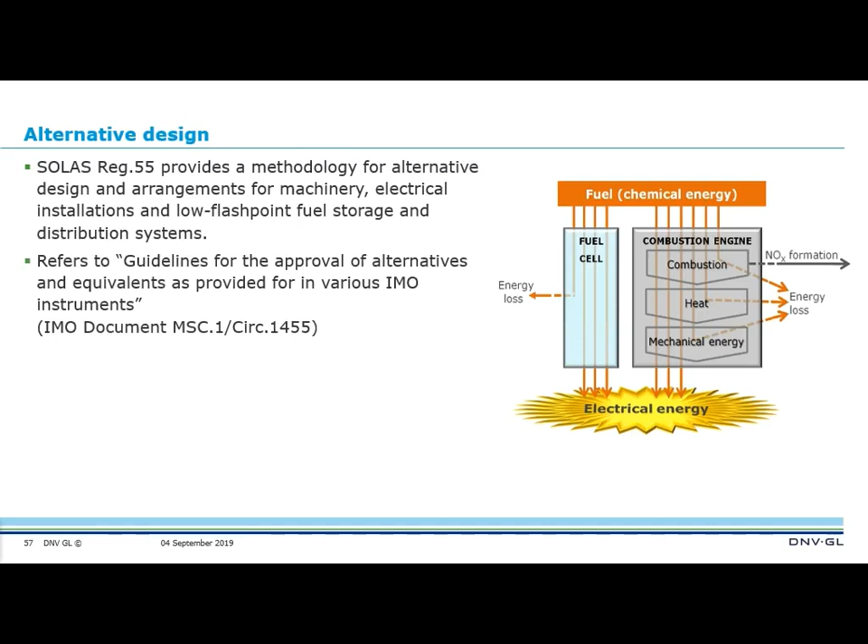So we're talking about safety, reliability, and dependability of the system, which has to be equivalent to a conventional system. That sets a huge challenge - to say it has to be as safe as a diesel engine, where you can turn it off, isolate the fuel, and everything's fine. When you've got a gas that moves differently, with different systems and fuel cells, it can be quite a challenge. However, things are coming quickly - I looked at some research that was only a year old and it was already out of date.

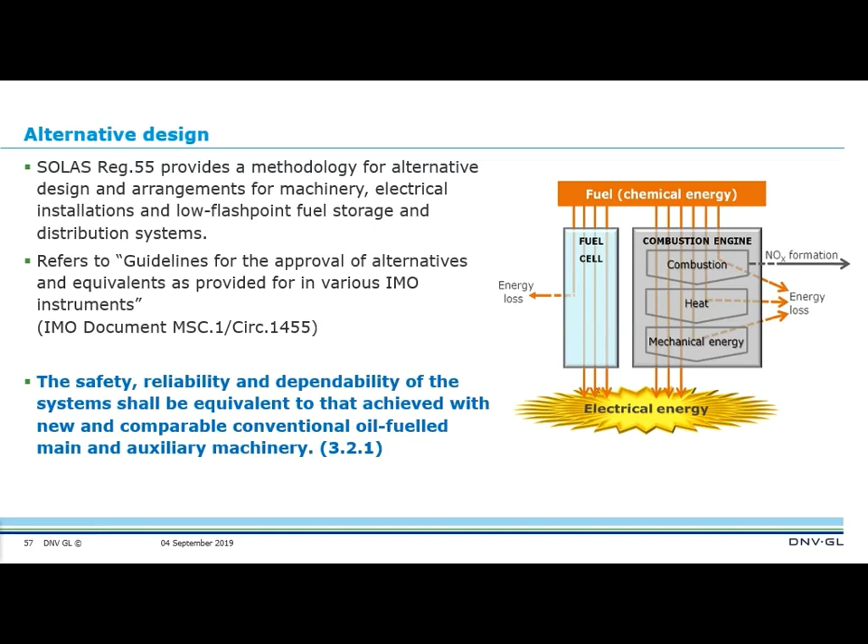So that one, as I said, was designed by Incat Crowther, which are based in Sydney.

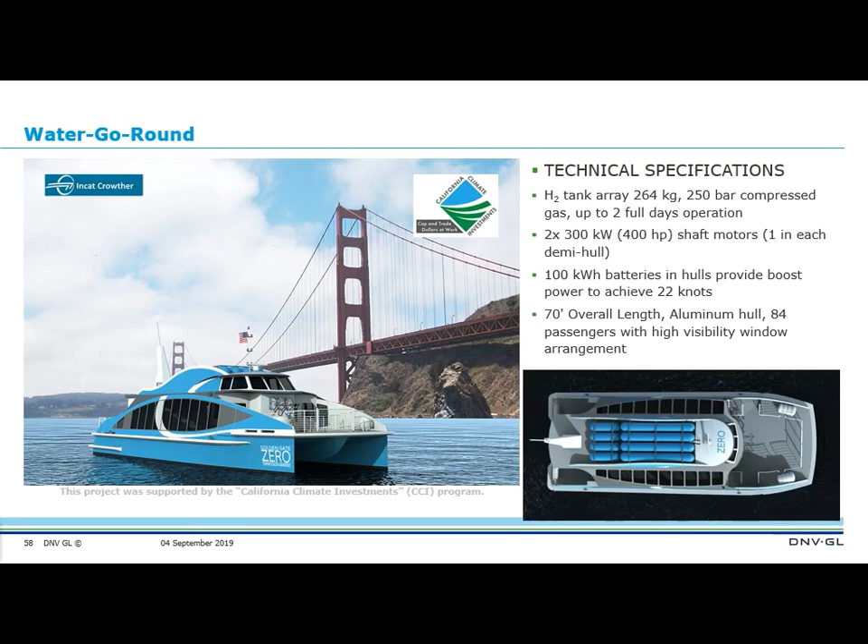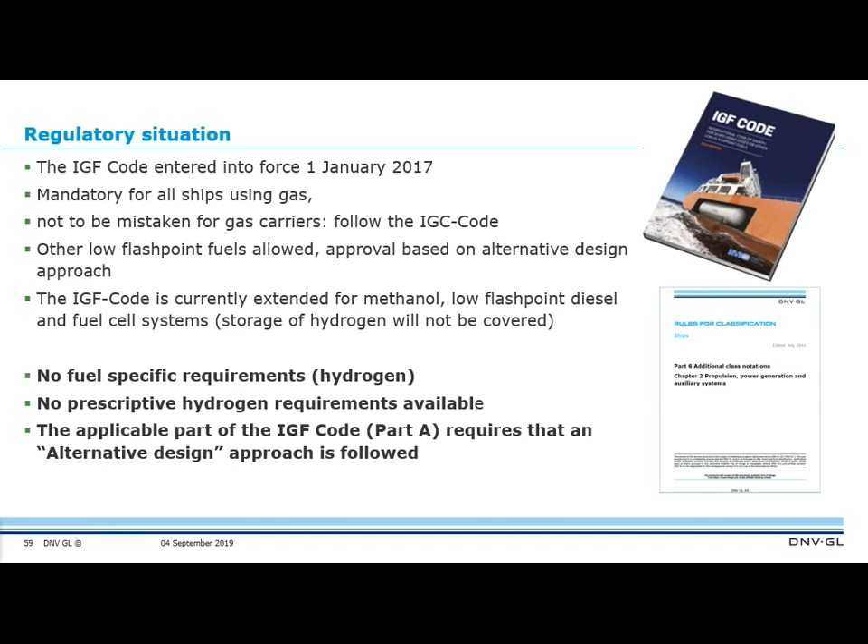Regarding the DNVGL rules, it's rules for ships, part 6, chapter 2, where you'll find all the references for what I'm working with today. Fuel cell notations exist there, and it goes through basically the safety, the locations, and the systems that are required.

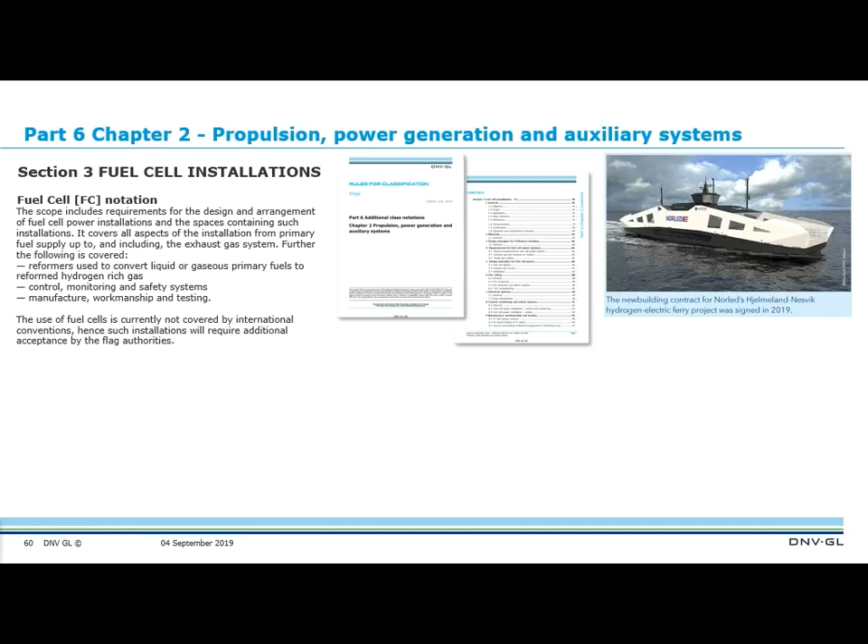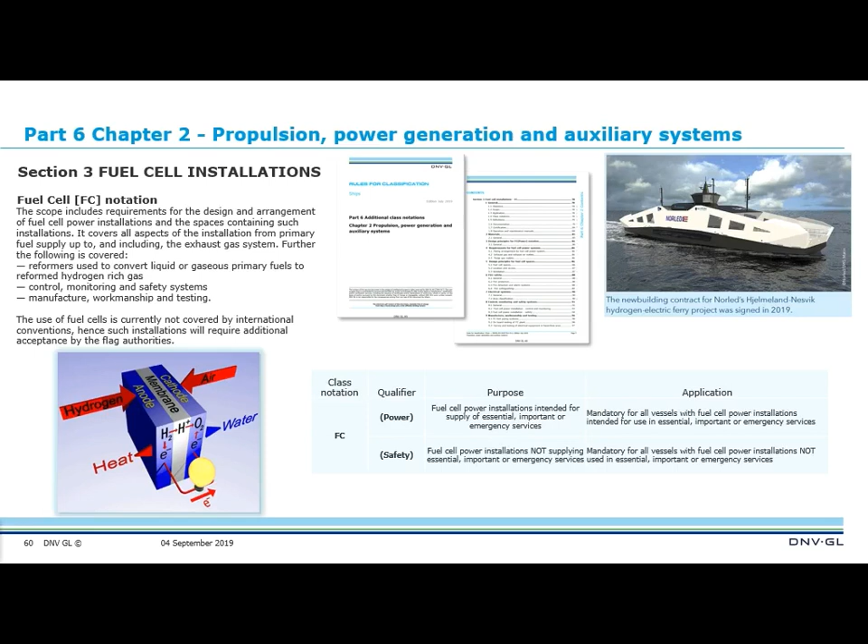We've got notations very similar to the battery. FC stands for fuel cell, and power when it's 100%, or safety when it's used in a hybrid system, with gas as a fuel.

In this case, the approach that the rules have taken is that we need to separate the gas from points of ignition, keeping in mind mechanical damage, etc. I'll talk about more of that in the next few slides.

You've also got leakage, so you've got to basically have double wall tanks, double wall piping, and leakage detection - so if you do have a leak, then how do you deal with it? Where do you have a venting system? What alarms, what processes are taken?

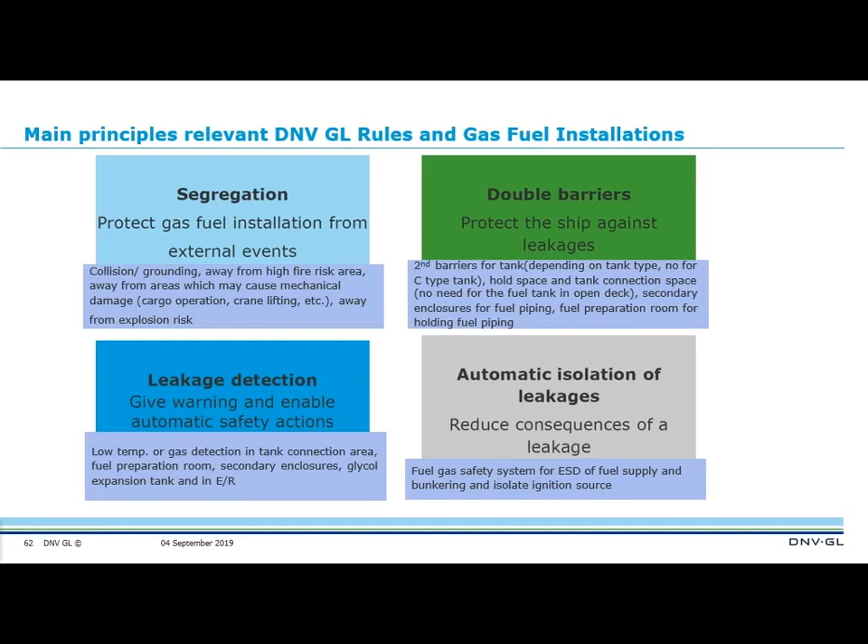And then you've got isolation of the leakages. As I mentioned, protecting the tanks - these are large LNG tanks - and the IGF code requires that they have to be a certain distance in from the side of the vessel. This is to account for collisions, and the number that's normally used is the breadth of the vessel on 5, or 11.5 metres, whichever is less. That's from the side of the vessel.

You've also got the rest of the vessel, which is typically B on 10, and in no case less than 0.8. And then on the lower surfaces of the vessel, B on 15, or 2 metres. That's also applicable to high-speed light craft, but it becomes a bit more of a challenge when you've got multi-hulls.

But that usually gets dealt with on a case-by-case basis, depending on the arrangement of the vessel, the likelihood of damage protruding through the hull. In a trimaran, the side hulls may be actually quite small, so therefore you've got a different situation.

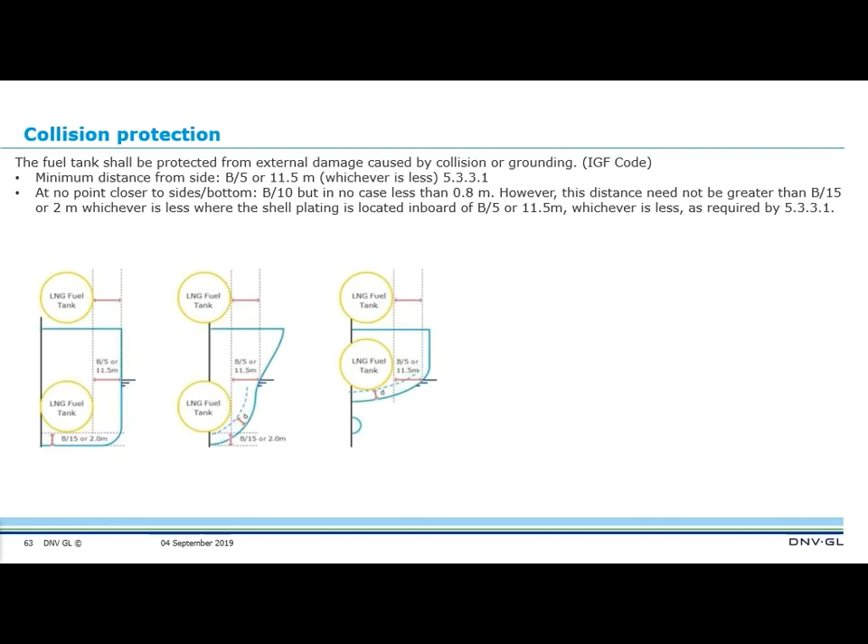What they need to be designed for is ultimate design conditions, where you need to look at dynamic loads, whether that be motions of the vessel, so you've got yield loads etc. for the mounts. You've got pressure loads, internal, external loads. You've got thermal loads, sloshing loads - so those are your normal loads.

You then have to look very carefully at fatigue, because we've got a vessel that's moving through a seaway with constant loads, and this is quite a sensitive piece of equipment. So you've got your mounts, which need to be considered, and you've obviously got temperature effects on those mounts, so that becomes quite a challenge. The last one is collision loading, collision and fire loading. So it's not just a simple matter of putting a good old tank in - it's quite significant.

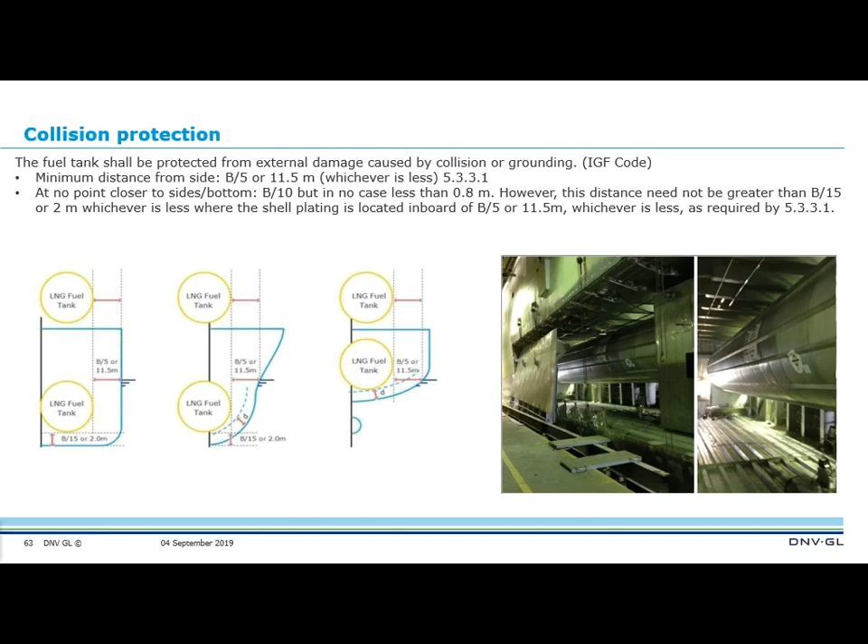Next slide - I think, as I mentioned before, Type C. Now these are the tanks you just saw an image of, and they are the ones that are double walled. They're inherently protected. But we're seeing other tanks potentially coming forward, and those ones will have to have their safety considered, and probabilities of damage and dealing with failures etc. will have to be dealt with.

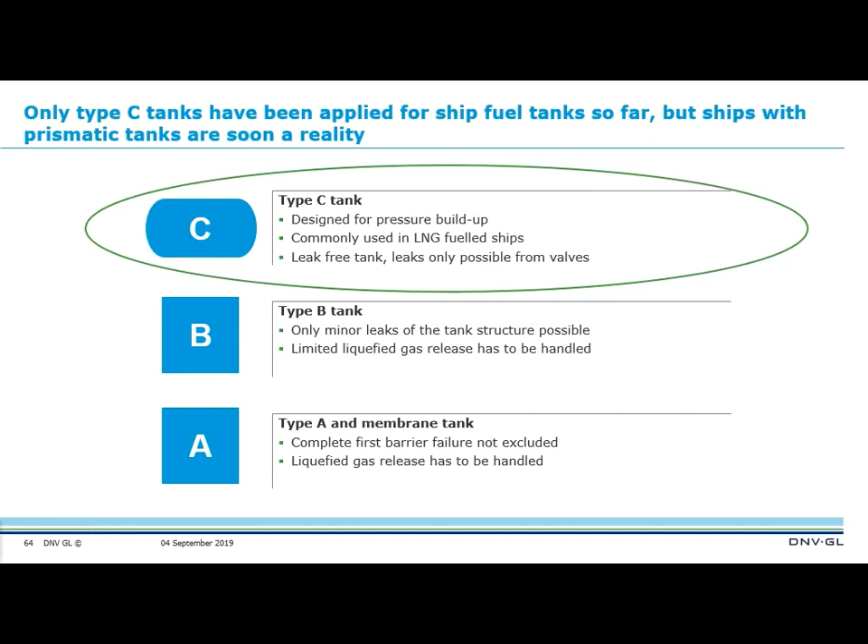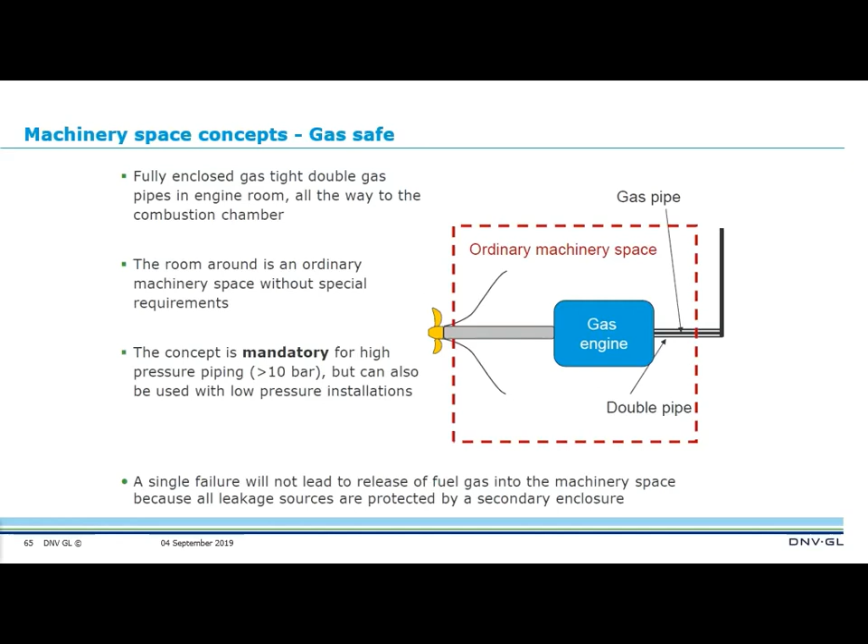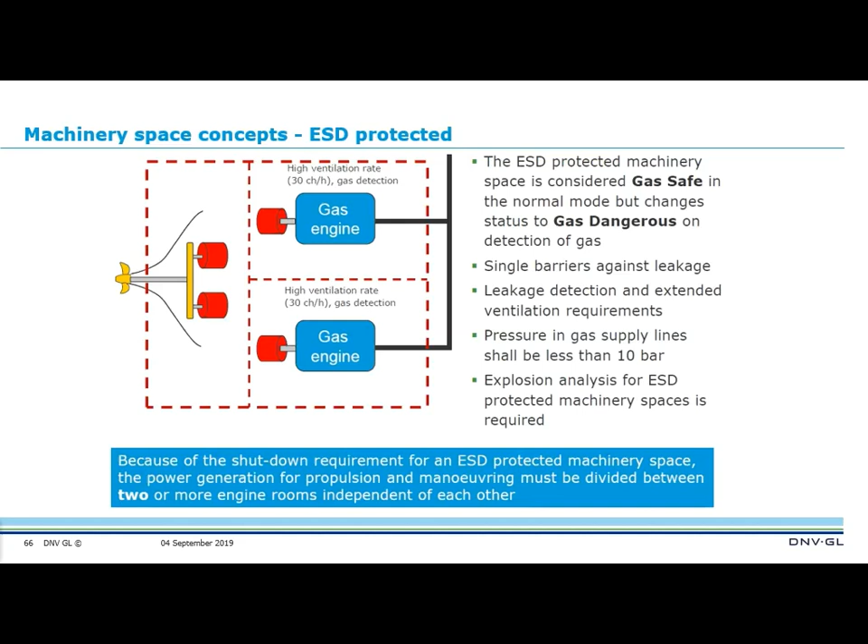The bunkering process is different to your normal heavy fuel and diesel fuel alike. You've actually got to prepare for the cooling, inerting of the system, connecting, draining. There's obviously the temperature effects, and there's a lot of training involved, so it's something that needs to be considered.

There has been other systems put forward where you drive in and load a cell on - the idea is that it'll be a pod that's loaded onto the ship and then taken off, removing the requirement of bunkering. Each approach has been put forward. This one's being used on the larger vessels. High-speed light craft is happening with the Francisco.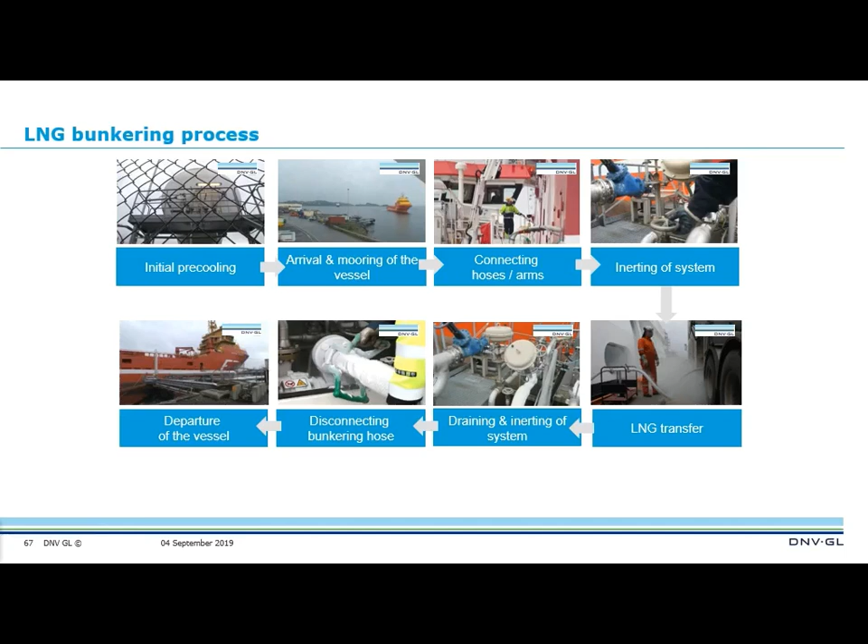So you've got ventilation. You've got to have systems in place to look after it and manage it.

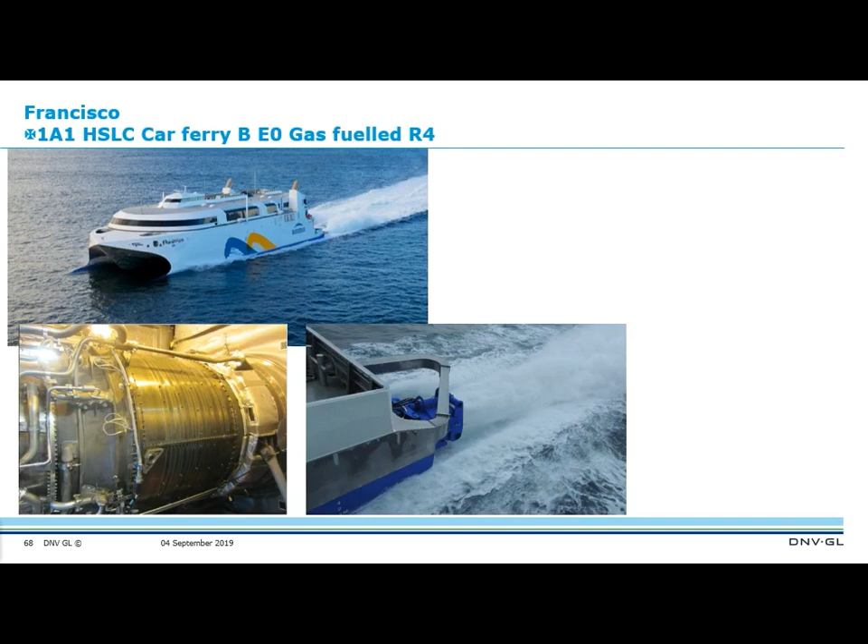As I mentioned, this is Francisco. This was a vessel launched in 2013. This is from Incat in Hobart. It's dual fuel, so it's got a gas turbine capable of running on liquid natural gas or diesel.

A little animation - what's interesting is that when it runs the gas turbine at the light ship trial speed, it achieved 58 knots. So that's an awful lot of power going through, and that's using the LNG. That's seriously impressive power.

Of interest, Incat have delivered more vessels like the Francisco and have got orders for more, so they obviously consider that to be quite a good process.

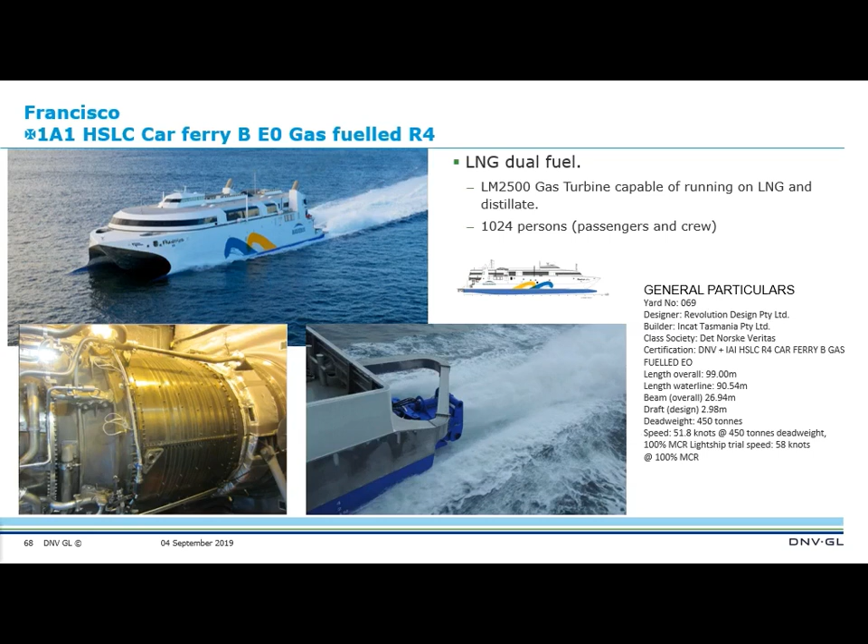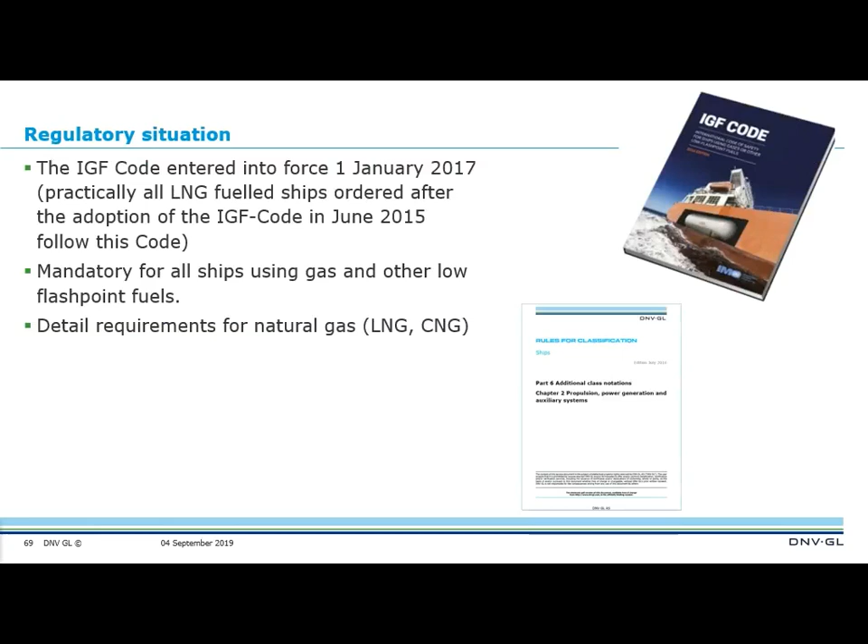Again, referring to the gases, which is the IGF code - it's mandatory for gas, and it's got detailed requirements for liquid natural gas and compressed natural gas. Again, we're looking at Part 6, Chapter 2, where we've got three different options: gas fueled for liquid natural gas, low flash point, and other gas fueled as well for liquid petroleum gas. As you can see from the number of pages and contents, it's quite a large section required.

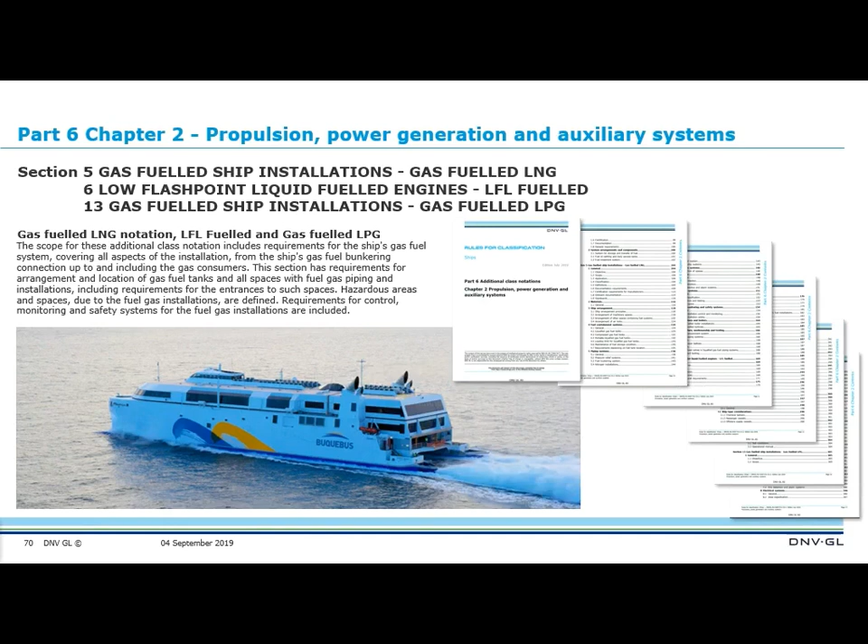So that's in a nutshell where we are with high-speed light craft and the future fuels. I hope that's been interesting, and if there are any questions.

We certainly have time for some questions, so who'd like to pose the first one?

Down the back, yes. So with bunkering of the LNG, obviously when you bunker fuel oil, you do a lot of testing to ensure it's of the right quality. What tests go on with LNG to ensure that it's of adequate quality?

Not sure - you take a bomb and you get it tested for its energy quality. It's called a bomb. It sounds like there is testing called a bomb. Sorry, I'm not an expert in some of those, I apologise - I was just very curious.

They're developing standards at the moment, so it's over to Alan. Yeah, Alan Taylor, I'm a member of the Institute of Marine Engineering, Science and Technology and Naval Architects.

You put on the board there again the nitrogen - sorry, not nitrogen, carbon. It's the oxides of carbon, the oxides of sulphur, volatile organic compounds. You go out and talk to people in society and they say all the carbon emissions - we don't even get it right in the industry, but we know what they are. True, it's typically greenhouse gases where the concern is. Yeah, but the problem is they don't come out and say greenhouse gases, they say carbon. Yeah, and we've had a Prime Minister that said you couldn't see it, so you couldn't measure it. So we've got issues to tackle. Well, I told the treasurer here one time in a meeting in Sydney, I said I can't see any trees up there - I looked around, plant trees.